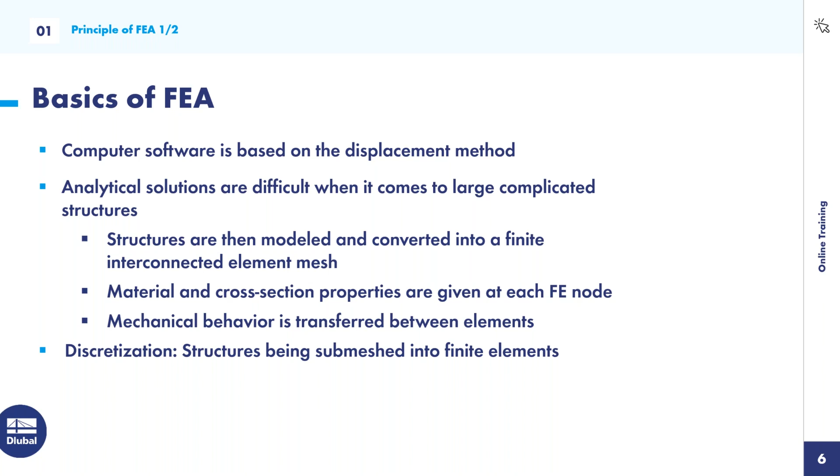The next thing to briefly get into is the FEA calculation workflow. I'm no expert on this; I just want to give you the overview and general knowledge of the workflow in step-by-step form. First, the program determines the local element stiffness properties. Second, the program changes stiffness properties at each node and converts them into the global coordinate system. Then the composition of the entire structure takes place.

Boundary conditions or supports are then defined, which can consist of sliding supports, rigid supports, and hinge supports, for example. Fifth, the displacement vectors are determined by solving the system of equations. And lastly, the support forces and internal forces can be determined, aka the results of the structure. With that general knowledge of the FEA workflow, we can dive into our next example, the continuous plate example.

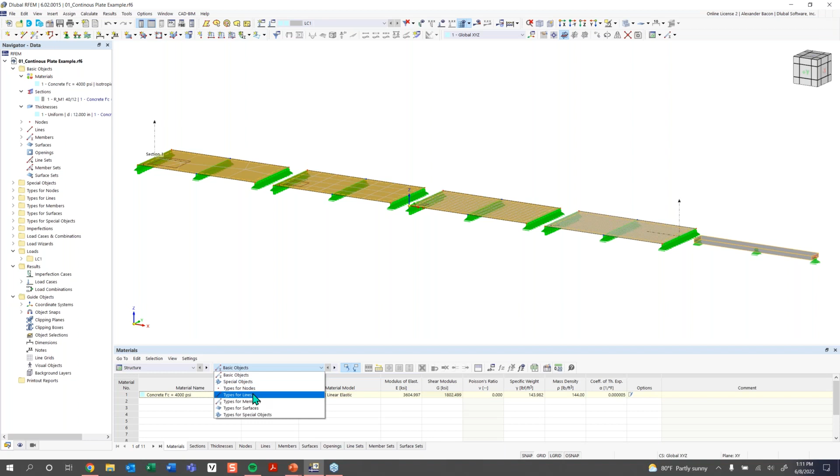And basically anything can be edited down to the coordinates of a node. So if I go to basic objects and node, you can see we have our coordinates for our nodes here, and these can all be adjusted. Also within the tables is where, if any design work is being done, all of the input data and results are going to be shown down here in the tables.

Next, you may notice that my background in my work window is white. Sometimes it can be black by default, if you've just recently downloaded RFEM. The color of the background can be changed to whatever you would like. So for example, if you go up here to options and you prefer a black background or a white background, that's under display properties here. And in the general category, we have background here. And then you can see you can change your background color to almost any color you'd like. So I'm going to keep mine as white, as I think for presenting it allows you guys to more easily see what I'm working with.

And that leads into the work window. So here's the work window. I can rotate my model, I can play around with it, I can manipulate it. So the work window is where almost all of your modeling will get done.

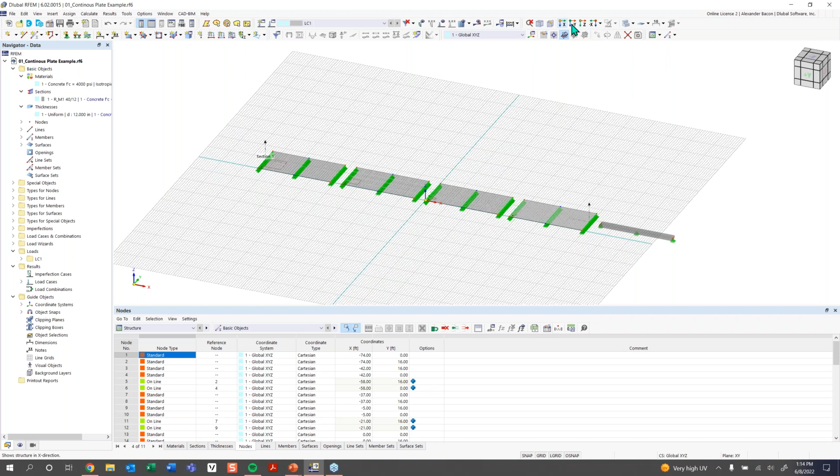Then next we have the views up here. So you can use these view buttons up here to change the view of your model, like so. And we also have a new addition, the cube up here, which also allows you to change your views as well. So this is one way to look and change the view of your structure. You can also hit this button and it will give you an isometric view as well.

Next, in the navigator here, right now, we're looking at the data panel. So there's multiple tabs down here in the navigator. So this first tab is called data. Second tab is called display. And within this display tab, I can collapse all of these subcategories here.

So we have subcategories such as model, results, and this display tab just allows you to turn graphically off and on anything that's shown in the window here. It doesn't deactivate or remove anything from your model structurally. It just deactivates the graphics.

So if I went under model here, and let's say I turned off surfaces, you can see the surfaces disappear. This doesn't actually remove the surfaces from the structural analysis portion. It just turns off the graphics. So basically, here is just where you can turn on and off things graphically. You can turn numbering on and off. So that's the display tab. It's kind of where you'll find all of that stuff.

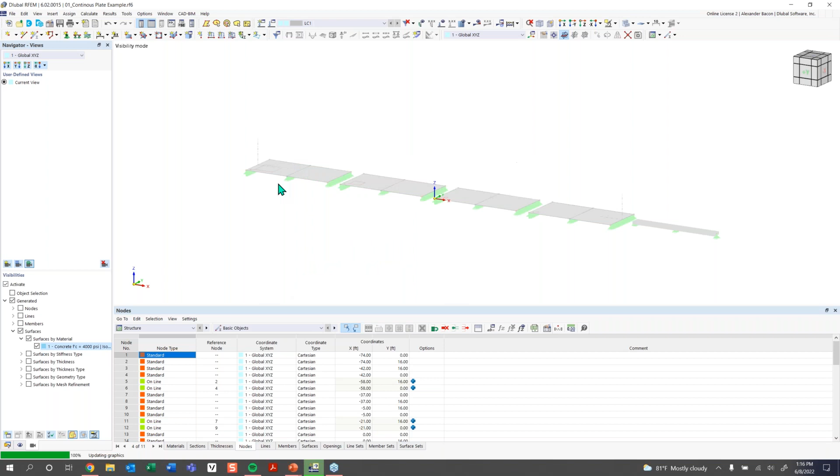Next, we have the views tab. This works a little bit similarly to the display tab, but with a function called visibilities, this can be activated. And now you'll see once I activate visibilities, I don't have anything visible to me in my model. That's deactivated. But let's say I only wanted to view surfaces that have a concrete material. You can see, once I activate the,

okay, so a little bit of crash there. Let's just reopen RFEM by closing out of that. And we can open RFEM back up. Sorry, everybody. One second.

And while that's opening up, should only take a couple seconds, we can give a poll. So the next poll I was going to give is this question. So throughout the training, I will be giving questions, and I would like to give this question. So that will launch now. If everyone could read it and answer it, then we can go over the results and correct answer afterwards. I'll give everyone a minute to do that, and we can continue after that.

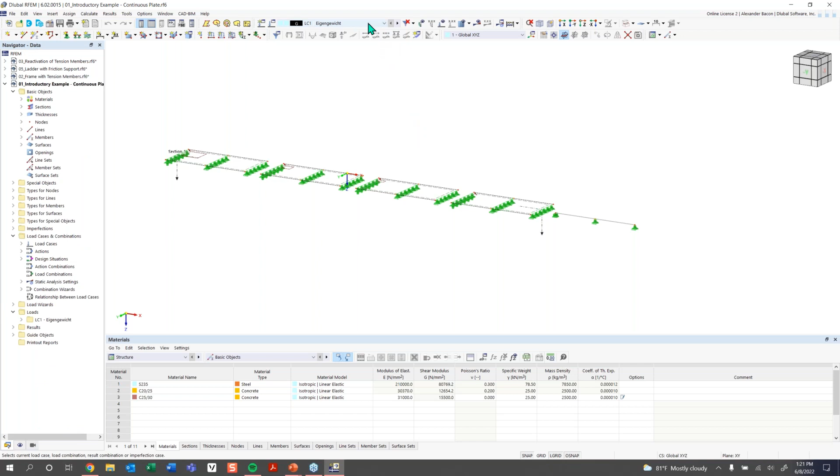And now jumping back into RFEM, the next thing I just want to do is just quickly run an analysis. So we're just going to run the results of this model real quick.

And then we're just going to quickly go over the results, nothing in detail. So just wanted to show you that once the results are run, this fourth tab here in the navigator panel is going to appear. As you may have seen before, we only had 3 tabs, but now the results have run, we have 4 tabs.

And then you're going to see these collapsible categories here. So we can either show our deformations, we can show member results, surface results. And this is how you manipulate and turn on and off the results you would like to see in the work window on the right-hand side here. So things like member internal forces, such as normal axial forces, shear forces, moments, torsional moments, things like that you can view on your members. And same with surfaces, you have internal forces and stresses, etc.

And also, when you're manipulating your model within the window here, if you have a mouse with a scroll wheel, you can click down on that middle button to move your model in translation. You can hold Control and click the middle mouse button to rotate the model, and then you can use that scroll wheel to zoom in and out.

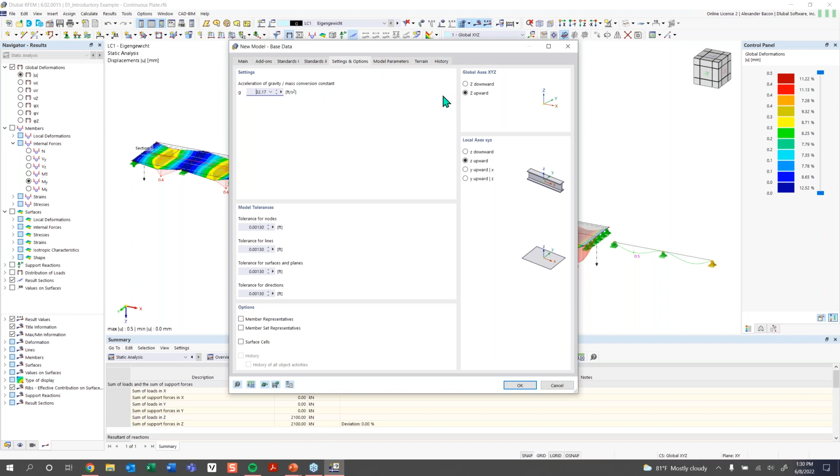Everything else we don't need to worry about. These other tabs we're going to skip for now. All we need to do now is click OK.

Once we click OK, a blank model will open up. Sometimes materials from other models can be carried over into this blank model, so I'm just going to delete those. Maybe some other sections can be carried over as well that are previously defined, so I'm going to delete those along with some thicknesses that were defined too. Now you can see in my work window I just have a blank grid here.

Now this grid can be customized. Let's go into the settings for the grid plane here. You can see we have grid points here. If we go up to this button, settings of work plane, grid/snap, etc., and click on this, we can take a look at our settings for our grid.

Right now the basic information is that we have a 50 by 50 grid points here. Right now my units are in meters, as you can see, so those points are spaced by meters.

I know this is an international training, so I want to show you that we can switch between imperial units and metric units. To do that, you can almost do that in any dialog box. You can see there's this button down here, units and decimal places. If we click on that, you can see under model that all of my units related to modeling are all in metric right now.

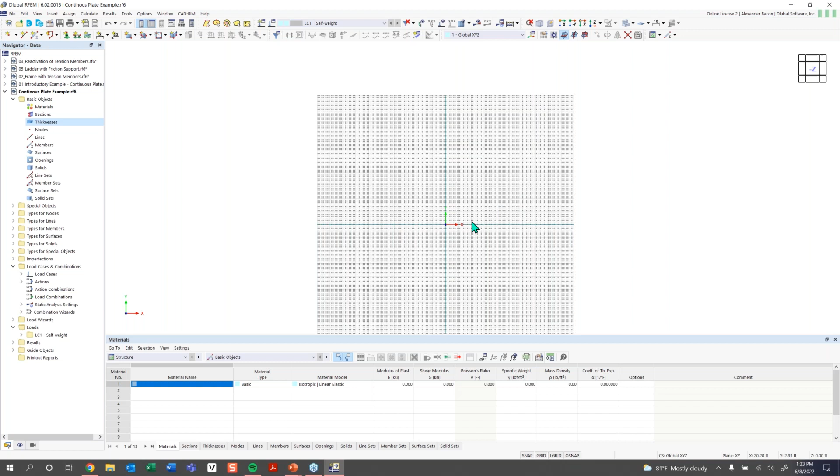You can see my grid here is 100 by 100 now. So now that we have the grid set up correctly, we can start to model our first continuous plate. I'm going to zoom in here.

I'm going to go up here to New Rectangular Surface, and this is the first tool that we want to use. I'm going to click on New Rectangular Surface to create this continuous plate, and now you can see this dialog box will pop up called New Rectangular Surface.

Then we just need to define a material for this surface and a thickness. First, we need to define a thickness, so I'm going to click on create a new thickness here, and the new thickness dialog box will pop up. Basically with the thickness, you can see what that is defining on the right hand side here. Normally you can think about this as with a beam member or column - that column requires a material and a cross section. As an analogy, you can think of the thickness as the cross section, and then we just need to give it a material. So every surface requires a thickness and material.

So we're going to make the thickness of this surface 12 inches. Then we're going to go here to material, and when choosing a material, you want to click on the button Import from Material Library.

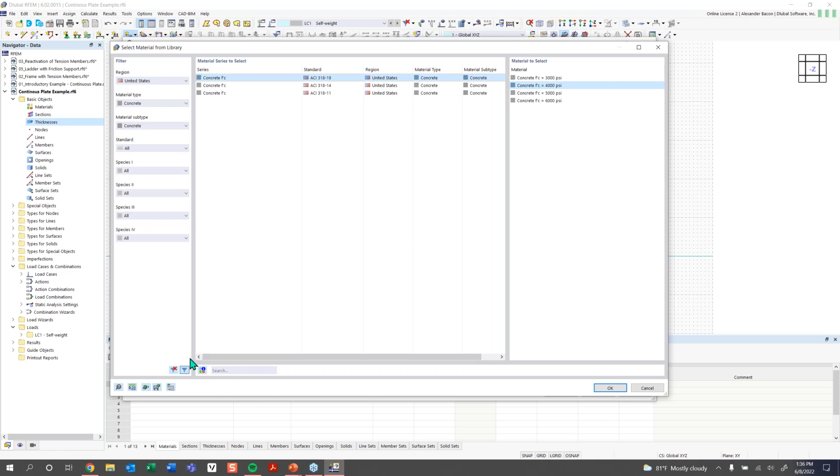On the right-hand side, we can choose the compressive strength of this concrete - we're going to choose 4,000 PSI. Now an easier way to do this is you can also just use the search function down here. Let's say I clear my filter here, I can simply type in concrete, and then I can find concrete here for the ACI and choose the compressive strength. So we'll stick with that - we chose concrete, 4,000 PSI.

The next thing I want to do, for example purposes, is edit this material by clicking on this edit button here. Once our edit material dialog box pops up, what I want to do is turn this material into a user-defined material, and I want to set my Poisson's ratio to 0, so this will give us equal distribution of our results across our surface, and then we can click OK.

This will help later on when evaluating our results. So now what we need to do is just click OK, click OK again, and once we click OK through all those boxes here, now you can see my cursor has changed to this reticle.

You can see that I am snapping to each one of these grid points here, so this will help me draw to the exact dimension to 1 foot the surface. You can also turn off the snap settings down here with this button, so you can turn those off and on. You can right click and see all of the different snap options - this is similar to AutoCAD in a sense.

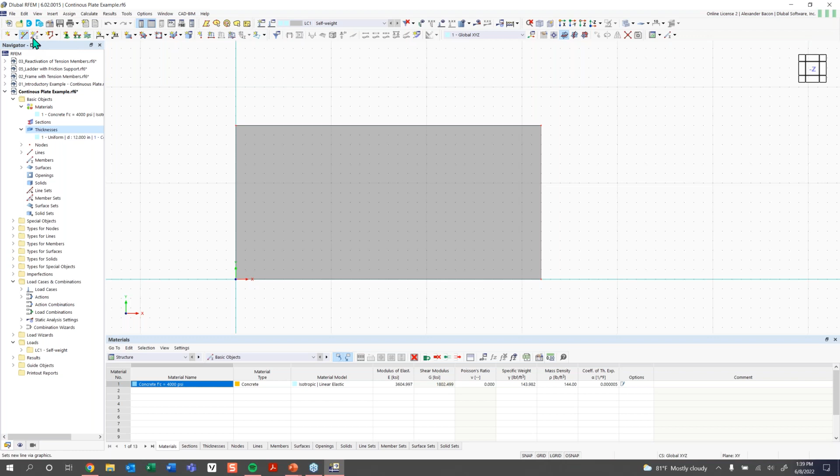Now all I need to do is either hit escape, or I can right click anywhere and simply exit out of that tool. Now the next thing we want to do is draw a line down the center, directly in the middle of this surface. To do that, we can go up here to the option New Line, and so you'll see the New Line tool will pop up, and now I can simply snap to the center of the top of this line here, left click, and just draw this line on top of this surface like so.

So that's how you can create a new line and draw a new line. We can right click out of that and right click again to exit fully out of that tool.

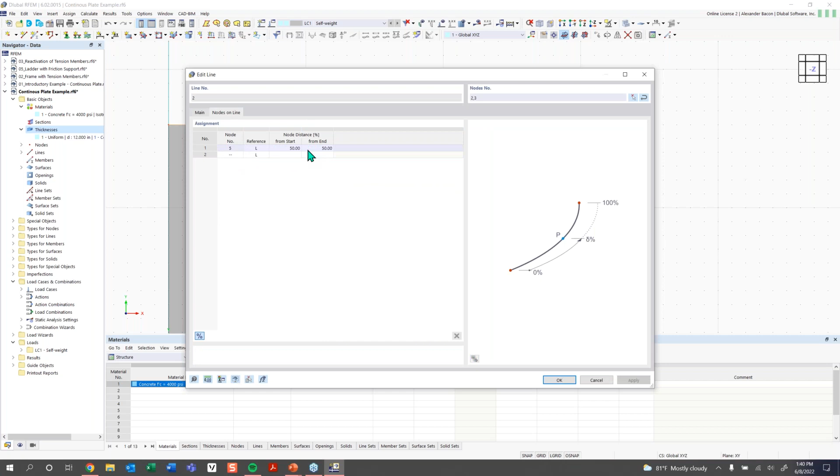Now you may notice that these nodes here are a different color compared to the corner nodes here. If we double click on one of these nodes to edit them, you'll see these nodes are set to the node type 'on line'. This means that if I click OK, these nodes are integrated into the line they're connecting to. So if I double click on this line and edit it, go to the Nodes on Line tab, you can see the node is being recognized and connected to the line I'm editing. If this node was set to the normal standard node type, it wouldn't be integrated into the line it's connecting to. This is done automatically, but it's good to know there are different node types.

Now that we have our concrete surface here, we want to support it. So to add in our supports, we want to continuously support the left-hand side of this plate, meaning we want to add a line support to this line on the left-hand side.

To do that, we can double click on it to edit it, and we have a list of options here. We want to add a support to the line, so this Support tab will pop up. Under line support, we hit this dropdown, and you can see we have a couple of preset definitions for what our line support should be.

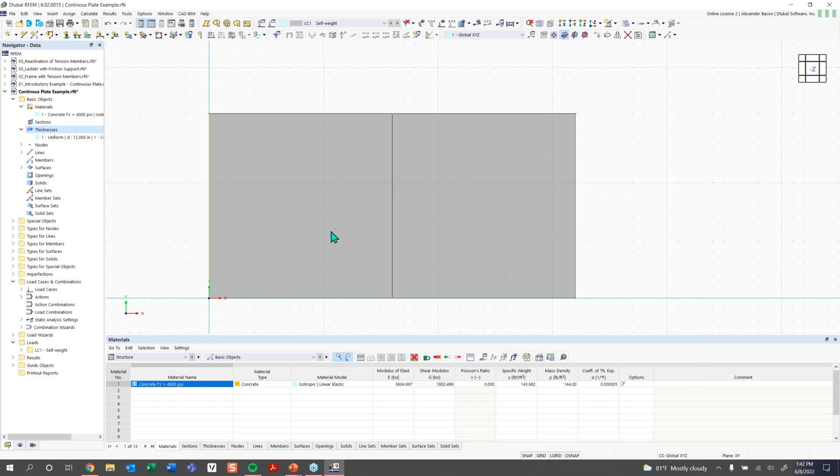I want this to be a hinged line support. A hinged line support means the first 3 translation degrees of freedom are fixed, so the support can't move in the X, Y, or Z directions, but rotation is fully released. This is what it's going to look like. We'll click OK, and click OK again, and now if I rotate the model, we have our side fully supported by those hinge supports.

Another thing to point out is if I double click on my line here in RFEM, you will always see the nodes making up your line. Also, if I edit this line support, you always see the assigned line that goes with it. So in RFEM, you're always going to know what objects are connected to each other via this upper right hand corner, and that helps you understand what's connected to what. So it's always clear there.

Now we can highlight our other 2 lines here, which we'd like to add supports to. If I hold Control and select these lines, there's also a button called Assign Line Support. I'll select that tool, and RFEM remembers my selection from before I clicked on it. You can see lines 3 and 5 are selected.

None of these presets are the definition of line support that I want, so I can create my own by clicking the new definition button. I want this support to be able to slide in the translational X direction, so I'm going to uncheck UX here, which fully releases the global X direction, but it's still supported in the Y and Z directions, and rotation is still fully released about the X, Y, and Z axes.

I'm going to click OK, click OK again, and now you can see those supports are added to my lines there.

Next thing we want to do is create a surface load, but before we can do that, it's very important to know that any loading you apply to your structure must have a load case assigned to it or associated with it.

So the next thing we want to do is create a new load case. You can see we already have our LC1 load case here, already created by default. The program will always create or have a load case that's already created. So what we can do is just click on the edit active load case here to look at that.

So this is where you can create load cases. You can have multiple load cases, and these will go into your combinations. We're not going to get into that this training. We're just going to focus on one single load case here. It has no action associated with it. We don't need to worry about that since we're not doing any design or anything like that, or load combinations.

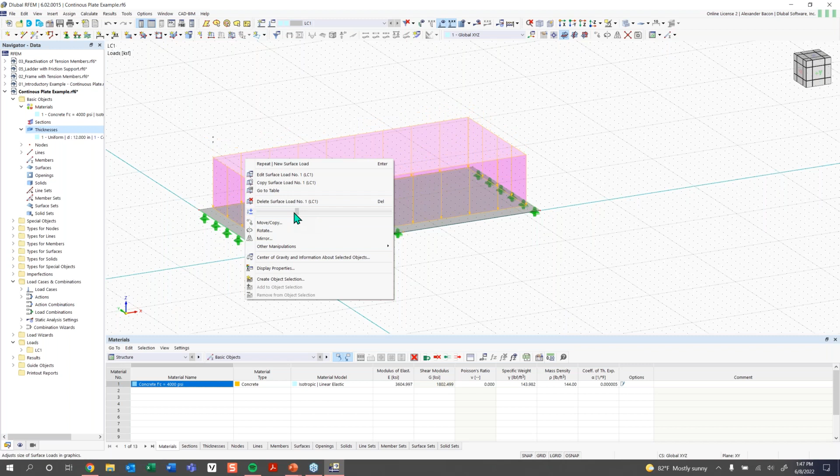Something else you can do is right click on this loading and you can adjust the size of it using this slider here if you would wish to do so. So now we have our plate here, it's supported, it's loaded. Next thing I want to go over is now the FE mesh settings, which are very important if you have a surface or any surfaces in your model. So to access the FE mesh settings, we can go up here to this button, hit this drop down, and we can access what's called the mesh settings here. And this is always important to look at before you run any results.

You can see these are the general settings, and right now under target length of finite elements, this is set to 1.64 feet, and this is going to be the global length that a finite element is set to throughout your entire model. So if this isn't changed, then this is going to be the length of your finite element. We're going to leave this as this length for now because we're going to add in what's called an FE mesh refinement. So with an FE mesh refinement, we can specifically tell the program for a specific surface what we want the FE mesh length to be.

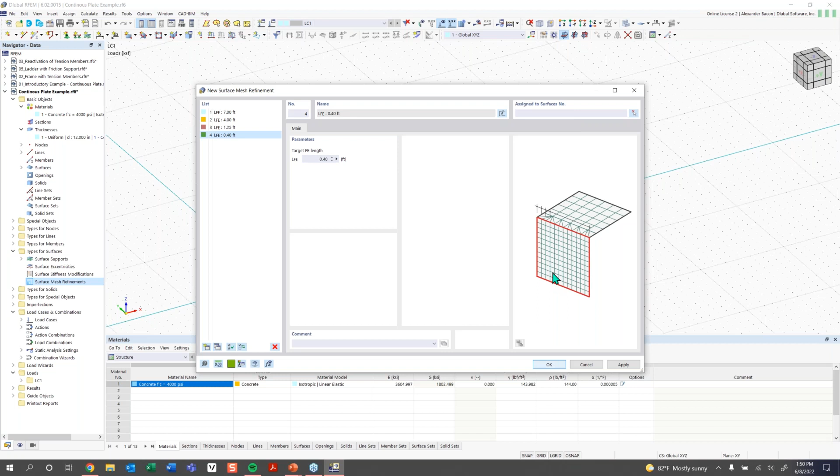And the next thing I want to do is make a copy of my surface here. So I'm going to highlight the whole thing here, and I'm going to use what's called our move/copy tool. With this tool, you can move something or make a copy of it, or do both at the same time, which is what we're going to do. We're going to create 3 copies of the surface. And we want to displace them 37 feet in the X direction. And what this allows for is a 5-foot spacing between each of these copies, since the surface is 32 feet long. And so now all we need to do is hit OK.

And now you can see I made 3 more copies of my surface here with all these supports and everything, and they're each 5 foot spaced apart. So now with our copies made, we want to create our single member, or our beam member, that we're going to use to compare results to.

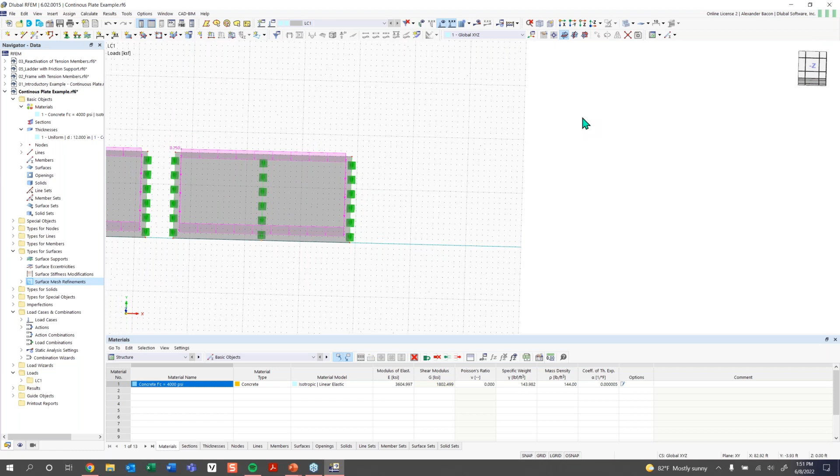Now to do that, you can see that we're going off my grid here a little bit, so I'm just going to highlight all of these plates and drag them to the left a little bit so we have some space here on the right hand side to model the member. So I'm going to hit reverse z-axis direction, and then I'm going to go up here to the button create new member.

Under new member, we're going to use the member type beam. This member type allows the member to take tension and compression forces and have fully fixed connections. What we want to do now is tell the program what cross-section this member is going to have and what material it's going to be made of.

So to define the cross-section, we can just go down here to section with material and click on this button, import from section library. Now here is the cross-section library that's in RFEM 6. You have different categories here. The category we're going to be focused on is the massive category, which is where we can choose our massive rectangle section.

And with this section, you can see we can define our material here. I already had a preset of our concrete 4000 PSI material, our isotropic linear elastic material here. And if this wasn't already defined, again, you can click on the material library, and this is the same material library that we've looked at from the surface.

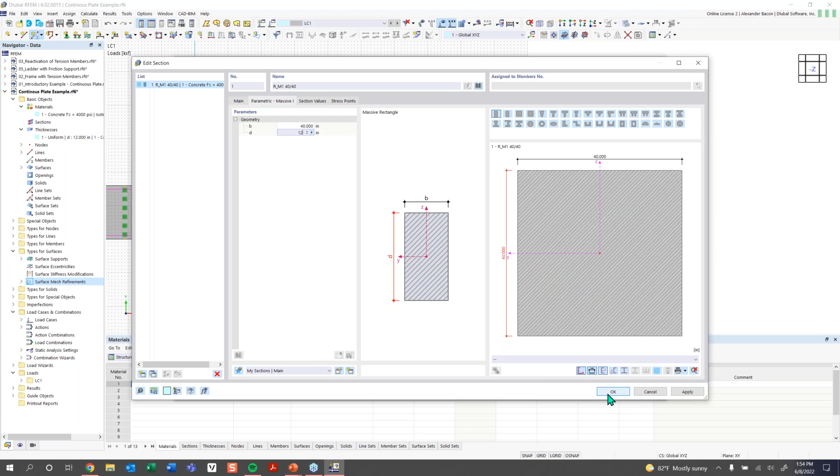Next thing we want to define is the parametric massive, or the dimensions. So we're going to go under the parametric massive tab here. I'm going to define the base, which is going to be 40 inches, and then the depth of the section is going to be 12 inches. So you can see how this is going to be similar in depth to our surface, which is what we're going to be comparing to. So with that defined, we can click OK and click OK again.

And now I can just draw my member, just like how I drew that line from before. I'm going to start drawing it 5 feet away from our plate here, right in the center. And I want this member to be the same length as the plate, which was 16 feet. So I can draw that 16 feet, or I can just type it on my keyboard without moving my mouse, 16 feet, and hit enter.

And I actually wanted to make that 32 feet. Sorry about that. So Control Z real quick. Let's see, draw that one more time. I actually wanted that to be 32 feet. There we go. Then I can right click, and now you can see we have our member here drawn the same length as our plates here.

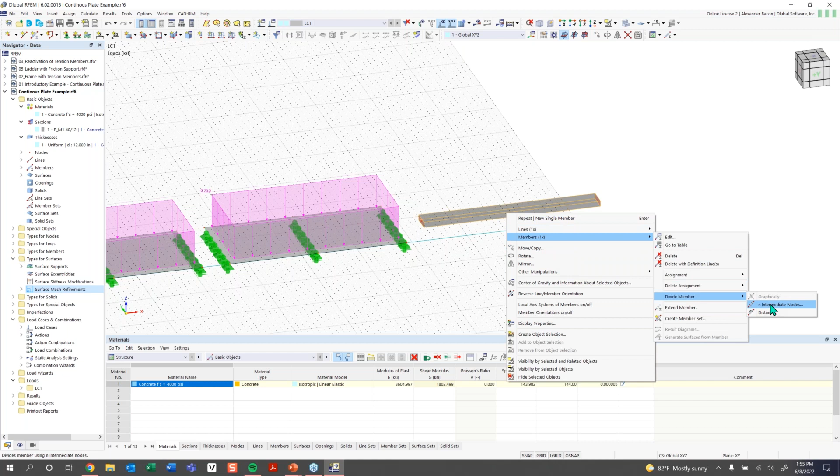Now this member is just floating in space right now, so we need to support it. I want to add a support directly in the middle of it. To do that, I need to add a node. So what I can do is divide this member by right-clicking on it, and you'll see my shortcuts menu will pop up. I want to go under member, divide member by a number of intermediate nodes. We really need to divide it by one node, so we're adding a node to the middle of the member.

But one critical option to turn on before doing this is create node on member, so that adds the node to the member without dividing it. We don't want to divide the member, we want to keep it as one single 32-foot long member, just with a node in the middle. So we'll turn that option on, divide it by one node, click OK. And now it's a little hard to see that node, but it's right there.

So now if I just highlight this first node here, we want to add our nodal supports. So I'm going to go up here to nodal support instead of line support, since this is for nodes. We'll click on nodal support. And we want this support to actually not just be a hinge support. You can see we have some presets here for nodal supports. We're going to want to create our own definition here, and I will explain why in just a little bit.

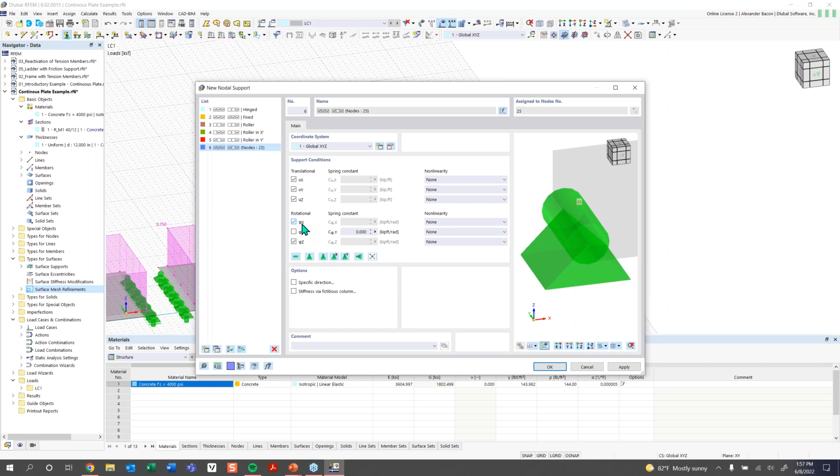But we want all of our translational degrees of freedom to be fully fixed, but we also want our rotation about the local x-axis of our member, or about the global x-axis of our member, to be fixed as well. So we're going to click OK. Click OK again, and so now you can see that support, the rotation about the x-axis is fixed there.

And now we're going to add in our other supports. So our other two supports for the middle and end of our member are going to be rolling supports that are allowed to roll or move along the global x-axis here. So we'll click OK. Oh, I just changed the support by accident. Let's just undo that. So again, we're going to choose rolling support. And with this, now we can just assign our support to our nodes here.

So the reason we needed to fix the rotation of the local x-axis for this one is if we didn't do that and all of these had the rotation fully released for all 3 degrees of freedom, this member would be allowed to spin about its own local x-axis indefinitely, causing an instability in the program. So always keep that in mind when you have a member that has torsion fully released on it, as that can cause an instability in the program.

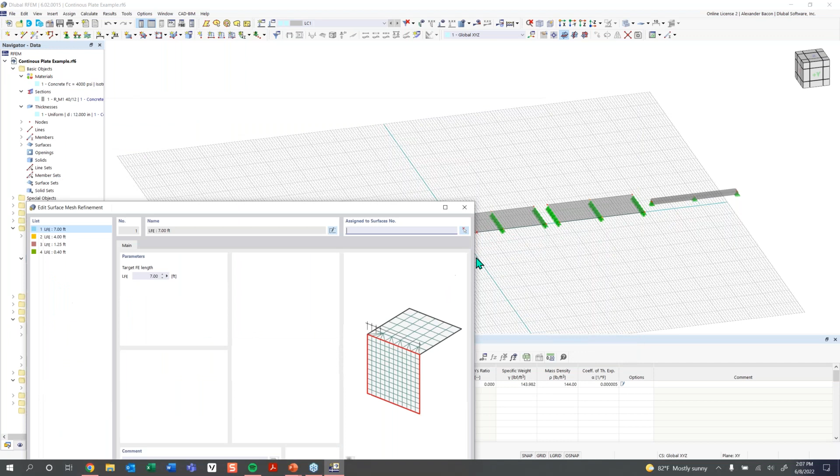So what we want to do is I'm just going to right-click on surface mesh refinements, hit edit, and go through here and assign them to our surfaces. So we're going to assign this first one to our first surface, and you can see we can do that graphically by hitting the button there and clicking on our first surface, clicking OK. We can do the same thing for our second refinement. Select surface here, select our second surface,

and then for our third one, again, we can do the same thing graphically, or if we know the number of our surface here, we can just type in 3, since this is surface 3 here, and then type in 4 for our last refinement, and hit OK. So now they change from blue to normal default color, and you can see we have these icons here now on top of our surfaces. And this is how you know that there's a surface mesh refinement on top of our surfaces here.

So now that we have those refinements, we can generate the FE mesh. And so to generate the FE mesh, you can do this manually. Normally this is just done once you run your results, but you can generate this mesh manually. So if we go up here to this drop down here and hit generate FE mesh, this will run the solver, and then our mesh will be displayed on our surfaces here.

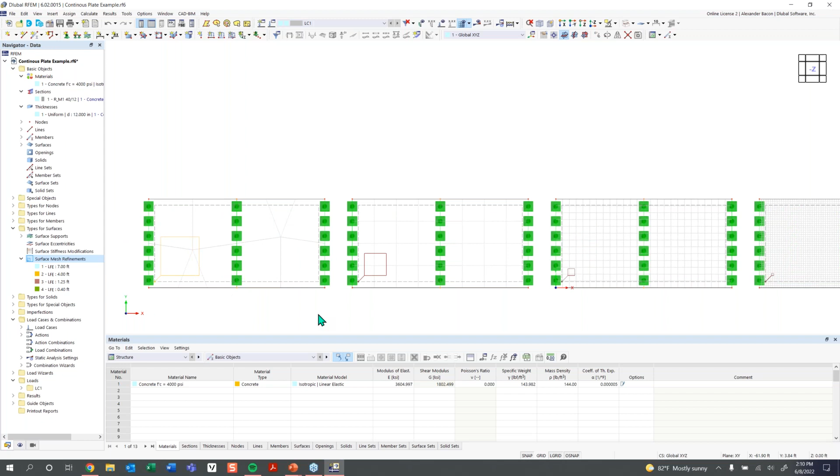So this first surface here, I would expect very inaccurate results from this surface. And as we move from left to right, the quality gets better. And I would expect very accurate results from surface 4 here on the right-hand side.

So the next thing we want to do now that we created our FE mesh is add in a results section that will cut through our surfaces here. So to do this, we can go up here to this button, set new results section. And to set a new results section, it just needs 2 points, point A and point B. We can click on this button up here, select 2 points graphically, and you can see I can snap to the center of my first surface here.

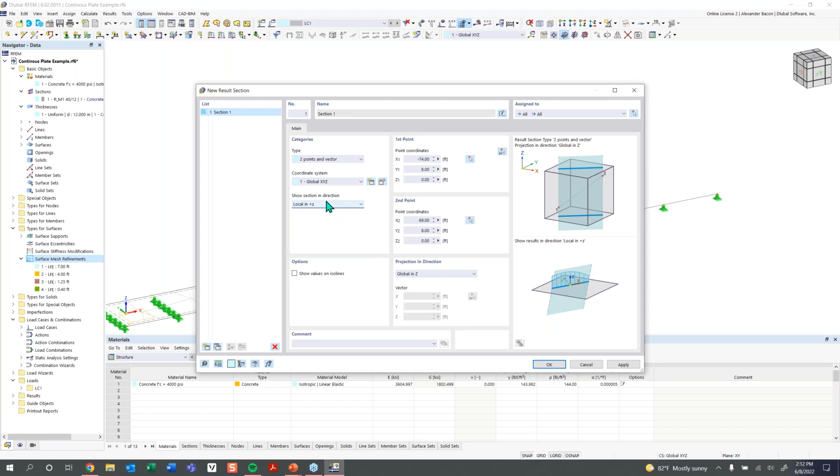And I'm going to draw this results section all the way through all of these surfaces here. So now we'll have a result plane section cut through all of our surfaces. And this is based on the global coordinate system, and it's going to be set in our local z-axes. So that's where the plane will be located, projection direction, and we can click OK. And now you can see we have these arrows here for our section cut. So it is in the global z-axis plane, and that's how our results will be shown.

So now we can calculate our results. We can go up here to this button called Calculate All. I'm going to click that, and RFEM will run through the solver and go through that FEA workflow that we talked about earlier and give us our results. Right now it is showing us the deformations, and also you'll see the results tab will pop up here.

And whenever you run your results, I always recommend taking a look at the global deformations first. This is always just an easy first visual way to check that everything is defined correctly and everything looks as you would expect. So if I look in this side view here of our model, the deformations are looking good, and they're looking just as we would expect them to look.

Now, whether this is accurate or not is up for discussion, but the internal forces are also the next thing we can take a look at. So we can turn off global deformations up here and check on members here.

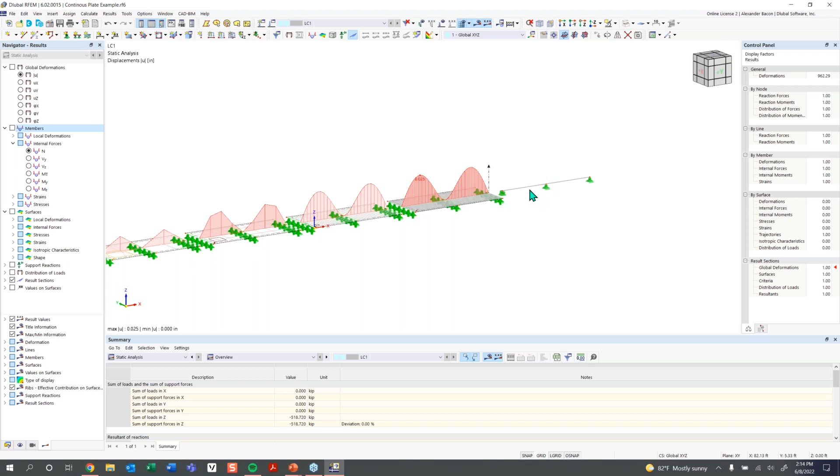And before we check on the results for the members, what we want to do is compare the results of our result section here with the results of our beam here. So what I'm going to do is select my surface here and select my beam. And what I can do is create a visibility by selected objects using this button.

And now you can see the other objects have been grayed out in the background, and now the only ones visible are the plate here and the beam. And what I'm about to show you is very important. So if we take a look at the results on the member, I'm going to check those on. You can see, one second, that my internal forces should be shown.

Oh, so what we need to do is check on moment. So we have checked on the results for members, and then under the internal forces here, we want to check on moments about the local y-axis. So that's what's being shown right here on our member, the moment about the local y-axis of our member.

So if you ever need to see how the local axis of the member is oriented, you can right click on any member and turn on the local axis system of the member. And so now you can see what that local axis system looks like right on the member, and you can see the moment distribution about the y-axis here.

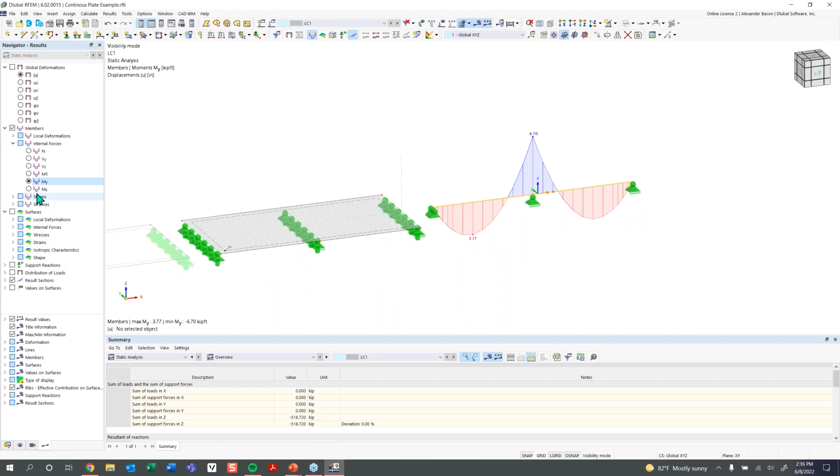Now we want to look at the moment distribution of our surface here. So I'm going to check on results for surface, and then go down here under the internal forces category, and I'm going to check on mx for basic internal forces. So mx here, again, lowercase x.

This means that for the surface, these are our bending moments in the direction of the local x-axis of the surface. So if I right-click on the surface, I can turn on the local axis system, and you can see the direction of that. And so we're showing the moments along that axis.

And so now I'm going to have to cancel out of this visibility. If I select these plates and members, there we go. So now you can see we can compare directly the moment distribution between our beam and our plate here. And these should be basically the same.

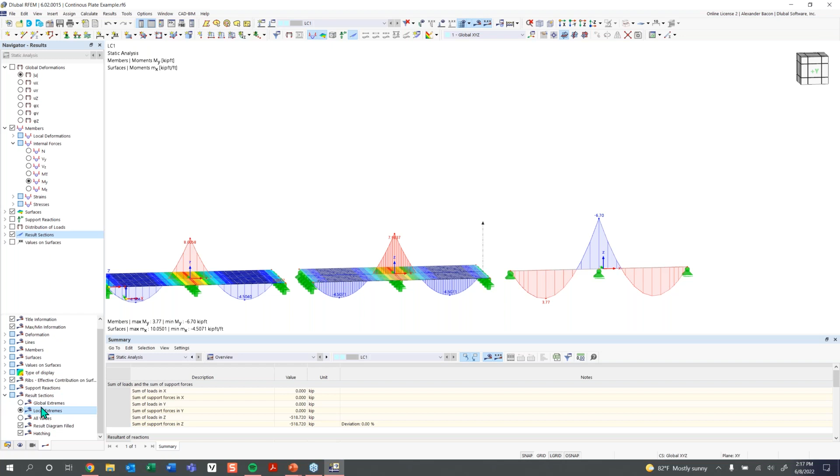So I'm going to also turn on results sections down here, turn on local extremes. So you can see that we have our results here, and they should be pretty close to the beam. And also we can show our shear force distribution as well. So I'm going to turn on the shear force in the Z direction, and then turn on the shear force for our surface in the X direction. And so we can compare those two.

So I was wondering why our results are a little off here. You can see I typed in the wrong magnitude here for either the surface or the plate. So I'm just going to change this to negative 0.25, and then rerun that calculation real quick. And we should see better comparison between those two elements.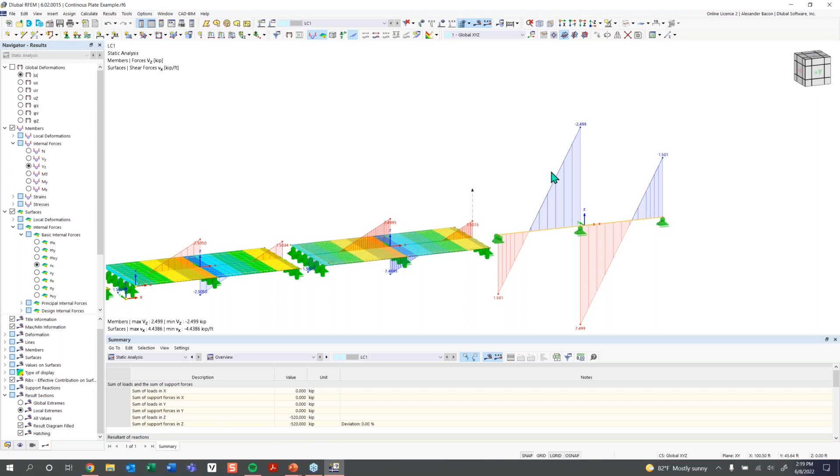Okay, so now you can see we have a max shear force here of 2.499 and a max shear force here of 2.499. So between our plate and our beam, we're getting very similar results. So this is how you can view the internal forces of a plate or beam.

And I just want you to keep in mind for these forces here what the lowercase axis symbol shows, and these all refer to the local axis system of what they're showing, so for surface and beam. So I'm going to clear those visibilities.

Also, there was a question about how to show the values on a surface, so I'm going to show that real quick. To show the values on a surface, we can simply go down here to values on surface and check that on.

And then you can see that the value is shown for each, if we go down here to result values... So we have values on surfaces turned on, and right here under values on surfaces, right now each value is set to a grid point. We can also change this to each FE mesh point, and you can also turn on symbols and numbering. So right now this is showing the shear in the X direction, so each of these is the shear that the surface is experiencing at that point. So it's always good to know how to view the values on a surface.

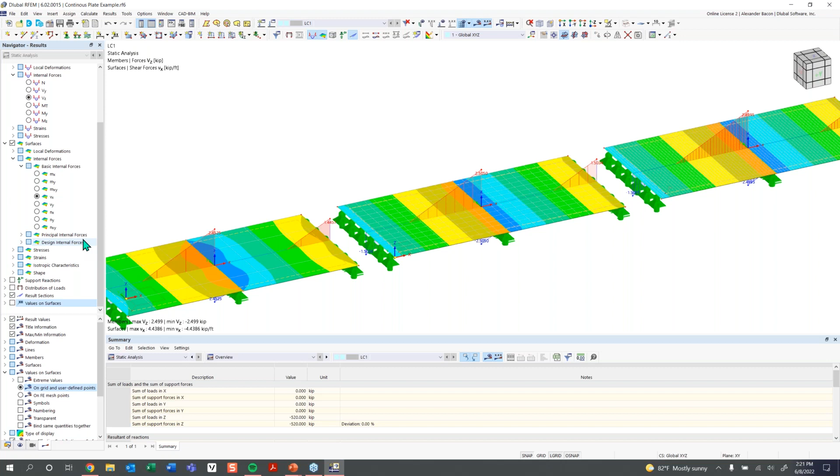And now we can move on to taking a closer look at our results sections for each of our plates here. So I'm going to go up here and turn on or look back at the bending moment for each of our plates here.

So if we take a look at each plate here, you can see that the bending moment is different for each one. Starting with this plate here, we have about 10 kip per foot, and you can see how that's decreasing, and each plate here with an increasing or decreasing mesh size is getting closer and closer to our control member here, which is what the result should be closer to. So you can see how inaccurate the results here of this plate with the larger, super coarse mesh size are. This shows the importance of making sure that your FE mesh is as fine as necessary but as coarse as possible, because if you don't check your FE mesh before running results, they can be inaccurate.

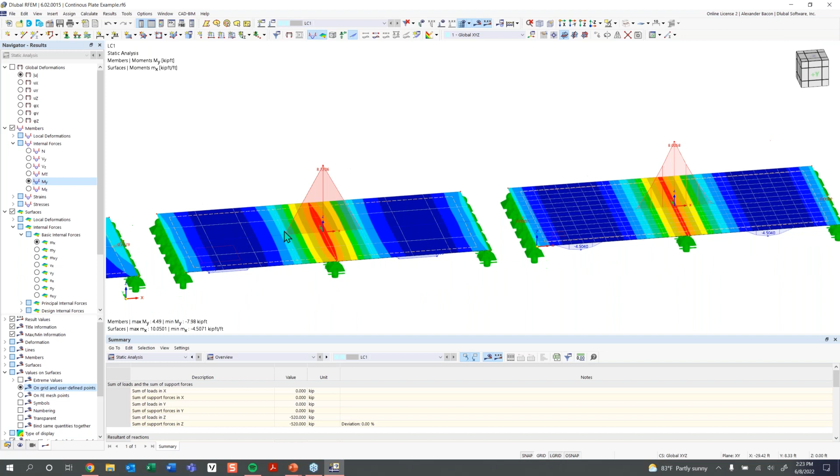Another good rule of thumb to keep in mind is to have at least 4 FE mesh blocks between any span or boundary of your surface. So 4 FE mesh blocks between any line here is usually probably the minimum you want your mesh to be at. So something like this would be too coarse, where we only have about 3 FE mesh blocks, or we have 4 - this would be about the minimum of how fine you would want your mesh to be. But as you can see, the finer the mesh, the more accurate the results.

Next thing to look at real quick is we can also take a look at the result diagram of our section here. So if we right click on our section, we can take a look at the result diagram. Right now we're looking at the internal forces Mx along our result section here. This is interesting because you can see what increasing or decreasing your mesh size does - having a finer mesh adds more data points along this line. You can see the more data points, the better looking our member or our moment diagram starts to look - it starts off very rough and then gets finer and finer.

So now I'd like to get into talking about shear stiffness. With shear stiffness, such as for this beam, if you wanted to compare hand calculations for this beam, you would have to take into account shear stiffness effects. Taking into account shear stiffness leads to things like increased deformation due to increased shear forces, and that in turn also leads to increased moments. This plays a major role with things like concrete, because the thicker something is, the more shear stiffness effects, or shear stiffness deformation effects, you will have.

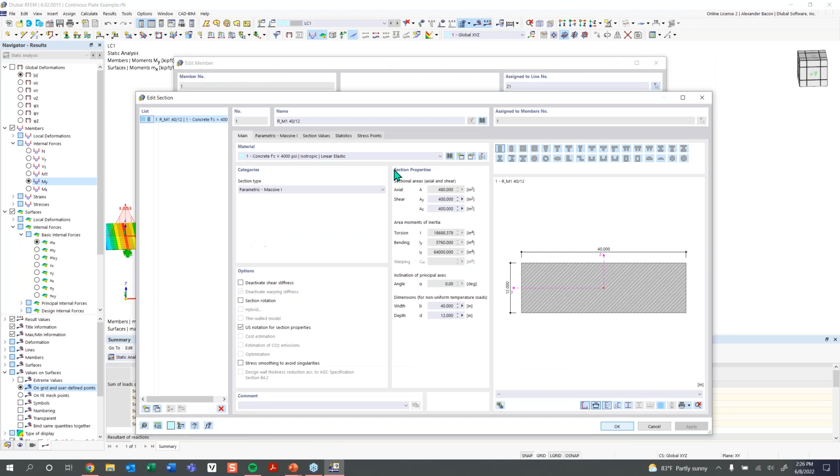There's an option called deactivate shear stiffness. If we deactivate shear stiffness and click OK, the program will tell us this requires deleting the results. We'll click yes, click OK again, and now we can run our results again, and we should see them change based on checking off this option.

Now you can see we have an increased moment here a little bit. Results haven't changed too much, but the moment has increased slightly, and this is because we deactivated the shear stiffness, or didn't take it into account with this beam.

Before we get into plate theory, I'd like to make an analogy between plate theory and two theories for beam elements. The first theory is Bernoulli's, and then the second theory is the Timoshenko theory, also called the deep beam theory.

With Bernoulli's theory we make some assumptions: first, that the cross section remains in plane and also perpendicular to the member axes. Second, that we do not consider any shear deformations, meaning the shear stiffness of the beam is completely rigid. These are the assumptions made with Bernoulli's theory, and this is probably what you're familiar with when doing hand calculations.

The assumptions we make with the Timoshenko theory are that the cross sections remain in plane, but don't remain perpendicular to the member axes. So shear deformations are taken into consideration here, and the shear stiffness is limited, not completely rigid. This is the more realistic approach, and we're taking into consideration not only deformations from bending, but also deformations from shear.

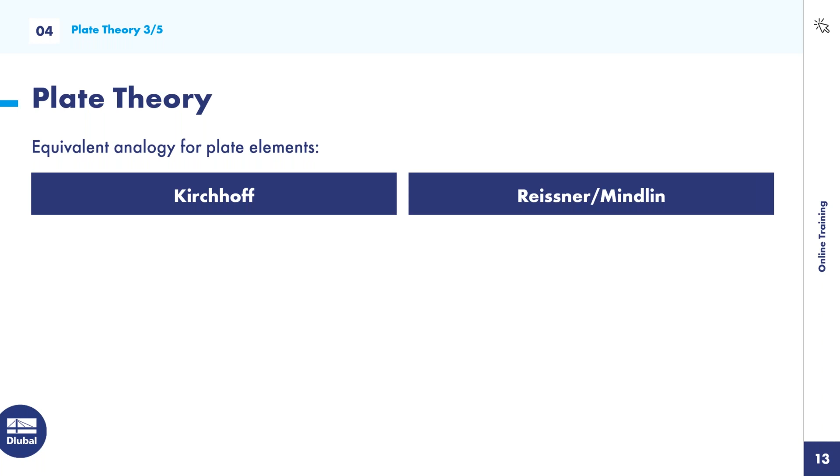So here are the assumptions for Kirchhoff's theory: we assume a geometrically linear or small deformation analysis, a linear elastic material based on Hooke's law, that the cross-section remains flat with no warping of the plate, and that the plate has a constant thickness.

And we're also assuming, which is the biggest assumption, that there's no consideration of shear deformations. And that's with Kirchhoff's theory.

Now, with the Reissner-Mindlin theory, we're assuming basically all of these same assumptions, but the major difference is that we are taking into consideration shear deformations, and including this, we are taking into consideration transverse and lateral strains.

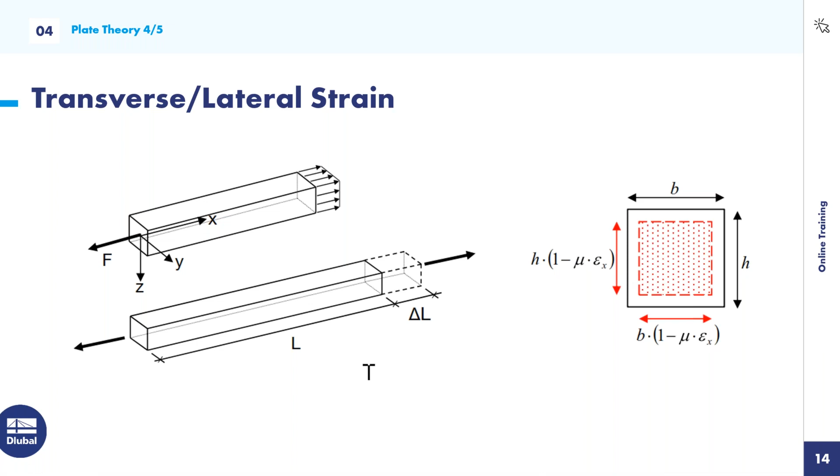So again, just to summarize, Kirchhoff's theory for plate theory yields pretty good results when using very thin plates, for example concrete slabs, like the ones we're using in our example. But keep in mind this only considers pure bending load bearing capacity, and it's just a simplified approach that works fairly well for thin plates. Again, no consideration of shear deformations with the Kirchhoff theory.

The Reissner-Mindlin theory, on the other hand, works great for thin plates and thick plates. The thicker the plate gets, the bigger the delta you'll see in the difference of results, and the more inaccurate Kirchhoff's theory becomes because of the shear deformations. The effect of shear deformations will greatly affect the thicker plates. So in my opinion, the Reissner-Mindlin theory should just be used by default, but it's good to know the difference between the two.

Now we can go back into RFEM and look at where these settings are located. If we go under the navigator here, under data, we can go under the load cases and combinations, then under the static analysis settings, and go under the geometrically linear settings to edit these. If we edit them, under basic settings, you can see the plate bending theory here, where you can change between Mindlin or the Kirchhoff theory. Like I said, Mindlin should just be used by default, but it's good for your knowledge to know we have the option between these two theories.

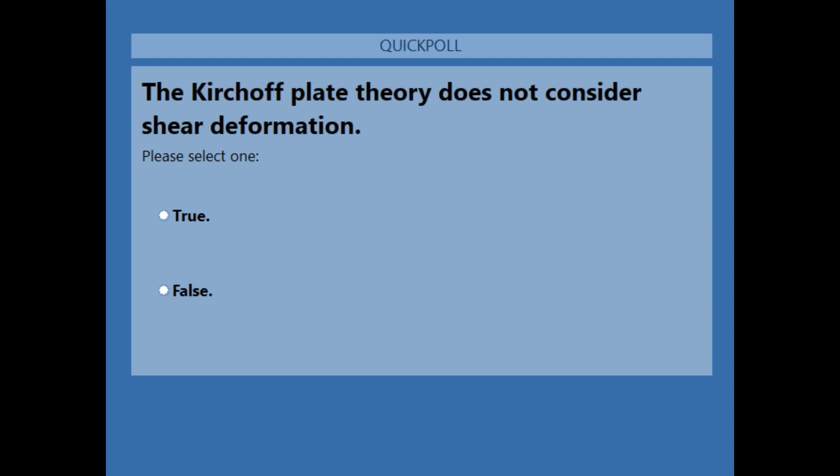All right, so I'm going to close that question and show the results. Awesome, everyone got this one correct. The Kirchhoff theory does not consider shear deformations - that is true. The Mindlin theory does consider shear deformation, so great job.

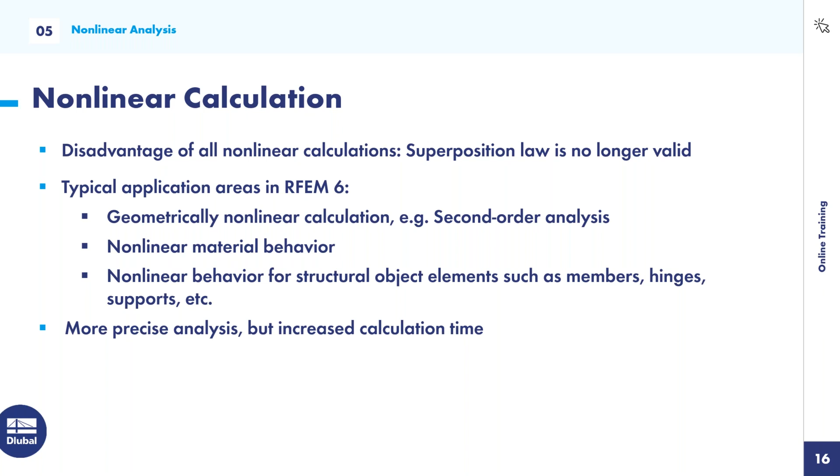Then we have nonlinear behaviors for structural objects or structural elements such as members, hinges, or supports, for example. We'll be getting into examples of these nonlinear behaviors in just a second. Keep in mind that these types of calculations can increase the accuracy of your model, but at a large scale can also increase the calculation efforts and time, similar to your FE mesh. So the more accurate you want your model to be, the more time is spent calculating. So we're going to go back to RFEM and look at some examples of these nonlinear calculations.

So I set up another model. I'm going to open that right now. And again, these models are going to be provided to you guys. You'll get them with the recording early next week or the beginning of next week, so I would expect these to show up on your end at that time.

For this model, I set up a frame, and this frame has some tension-only members in it. If I double click on one of these members here, on this cable element from this X bracing, you can see that the member type is set to tension. With this frame, we're going to imagine that the top of this frame is connected to another building. I'm going to turn off the grid so we can imagine that the top is connected and braced by another building. So we need to brace this wall in the global X direction, and this is the reason why we needed to add this X bracing in.

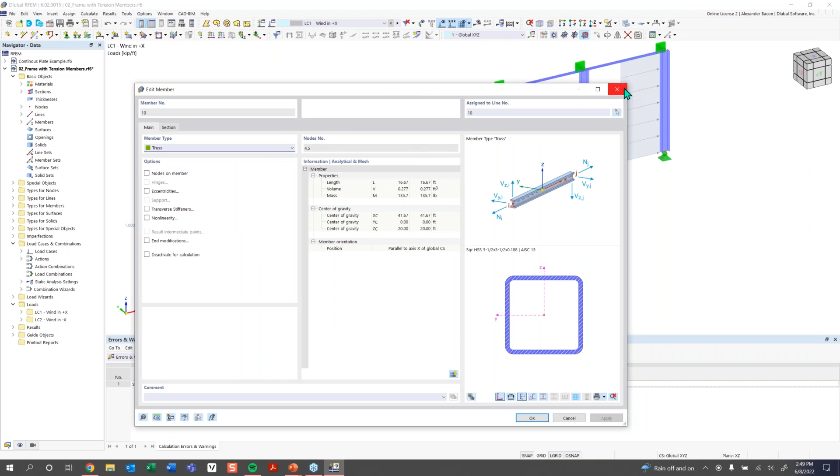The reason for this is because our structure is just not stable and needs support in the global X-axis. You can see that we have all hinge supports here. These supports up here are not providing any support in the X direction, all of our connections are hinged, and our members at the top are truss members, meaning that the moments at these connection points are fully released. So this whole model is just not supported in the global X direction. So we need to stabilize this model, and we can do that by adding in X bracing. So I can go up here to new single member.

And under new single member, you can see we have member types. So we have beam. Beam type is the type you are going to be most familiar with. This can take tension and compression and has fully fixed connection points, meaning moments and shear forces are transferred between connections.

We have a truss type here, which can only take axial forces like tension and compression, but the connection points are fully released, so no moments are transferred between connections. And then we have our tension members, which can only take tension and cannot take compression. So these are our nonlinear members here.

And what we want to do is go into our section here and change our cross section to a 1/4 of an inch round section here, which will act as our cable element. So we'll click OK. And now we can draw back in our X bracing here and do that like so.

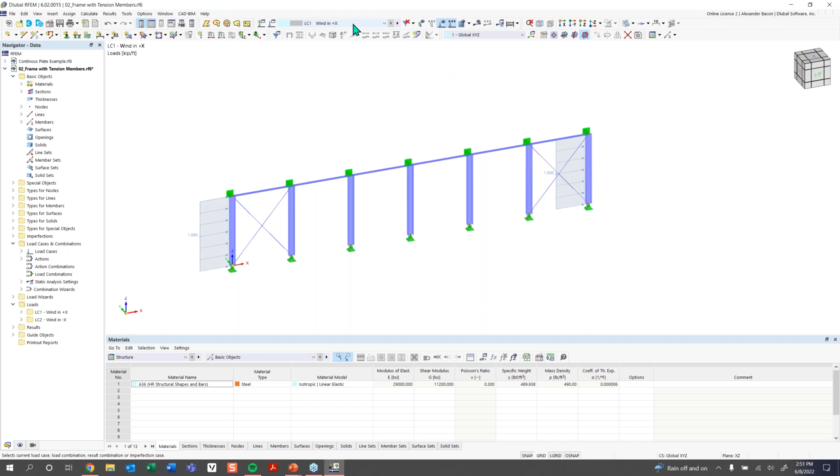And so now let's try running our results again. So now you can see that we have our results. And if we take a look at our deformations, we can turn off our loading. You can see that this member right here has extended since there's a wind load on this structure being forced into the X direction.

You can see that this cable element is still activated and taking on those tension forces. But this one here has been grayed out and has been disabled because it's taking compression and it cannot do that. And you can see the same thing for this tension element on the right-hand side.

We can also check on the results for our members and take a look at the normal forces or axial forces. And now we can see what the axial forces are on those two cable elements that are taking the tension. So red is positive for tension. You can see the blue here is negative for compression.

And then if we also take a look at our wind loads in the opposite direction, we should see the same thing. So we'll run that. And now you can see the same thing is happening if we take a look at our global deformations. The other member now is taking compression and disabling, and the opposite member is now taking the tension forces.

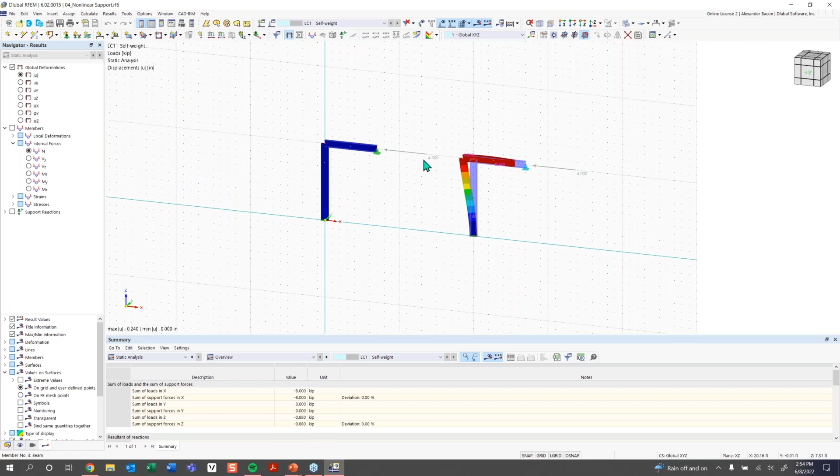And so with this model, you can see here, I just have two frames here supported at the top here. And you can see that I have on the right-hand side this nodal support here in blue. And the reason why this nodal support is in blue is because it's telling me that it's a nonlinear support.

So anytime you see a support that's blue and not green, that means it's a nonlinear support. Green means that it is a linear support. So let's double click on this support and see what's going on and edit it. And you can see under our definitions here, everything looks normal. All 3 degrees of translational freedom are fixed here. Our rotation about the global z-axis is fixed.

But for the x direction, we have a nonlinear set. So if I click on this drop down here under nonlinear, you can see I have checked on failure if negative px. And what this means is if this support experiences a negative support reaction, it will fail. So yeah, it'll fail, it'll disable, it won't add any support if a negative support reaction is activated.

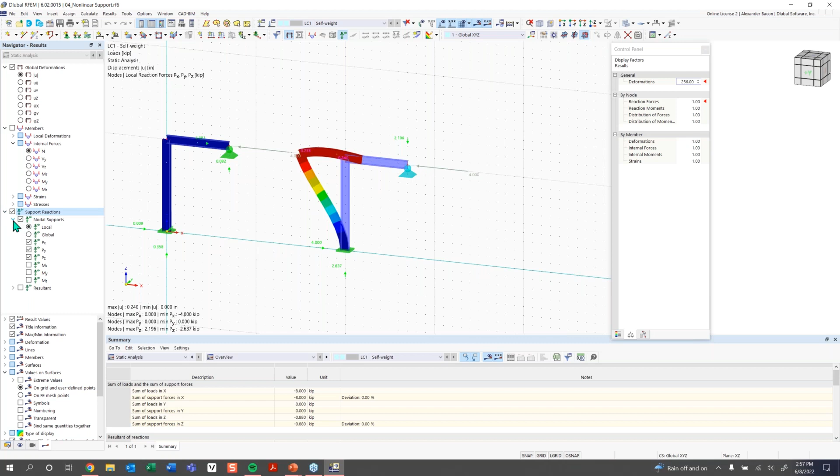And you can see here on the right-hand side that our nonlinear support with the same setup is failing because it's experiencing that negative support reaction. And so it's disabling, and you can see how that affects our frame here. And we can also take a look at our support reactions by turning on support reactions here, and we can see those support reactions from the forces there.

So before I get into the next example, it looks like we're approaching 3 o'clock, so I think we can take a break soon. So Siska, are there any questions from the chat? Yeah, we only have one question.

Someone asked if it's possible to assign hotkeys to a command. Okay, yeah. Yeah, that's possible in RFEM. You can assign hotkeys to a command, which is actually pretty helpful. To do that, let's say we wanted to change the command of the save function or something like that, you can go up here to the

customize menus and toolbars, and we can go under, let's say, tools, and let's say we wanted to add a keyboard shortcut to the measure function, for example. You can add a keyboard shortcut to any of these functions up here by just double clicking on them and then entering the shortcut on your keyboard, and you can set that. And so that's how you can assign hotkeys to any command within RFEM.

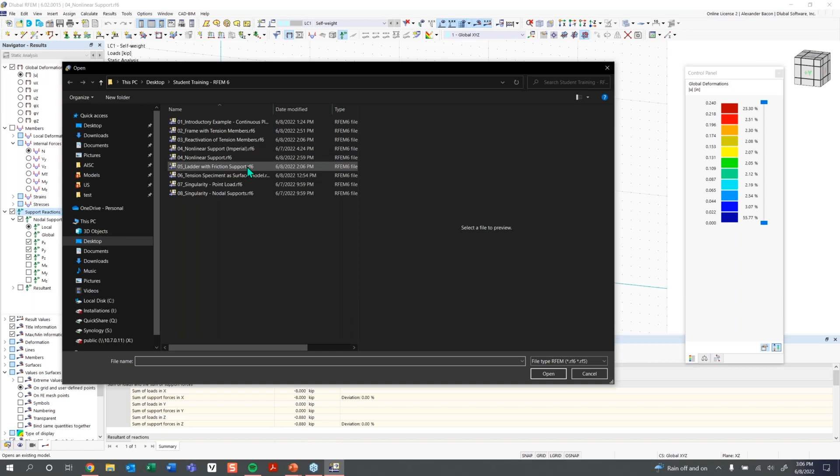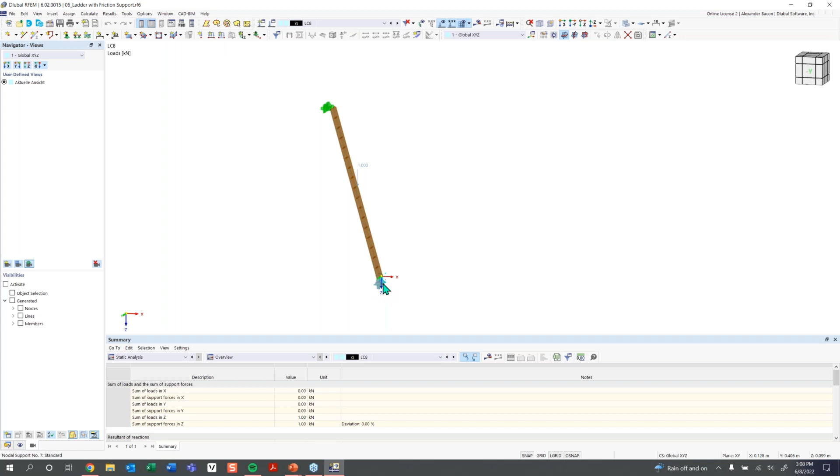And we're wondering, at what point will this ladder slip the higher and higher somebody climbs it? We want to make sure that the friction at the bottom is enough to keep this ladder from slipping out into the X direction the higher somebody climbs it. So what we did is we made these supports down here nonlinear supports. So if I edit these supports by double clicking on them and looking at the definitions of them,

you can see that there's no rotational support. They are fully fixed in the Z direction, so they're resting on a solid surface, but this ladder could slip out in the horizontal or lateral direction. So in the X direction and the Y direction, we have activated the nonlinearity friction PZ. And activating these, you can see that now we have some new tabs up here for UX friction PZ and UY friction PZ.

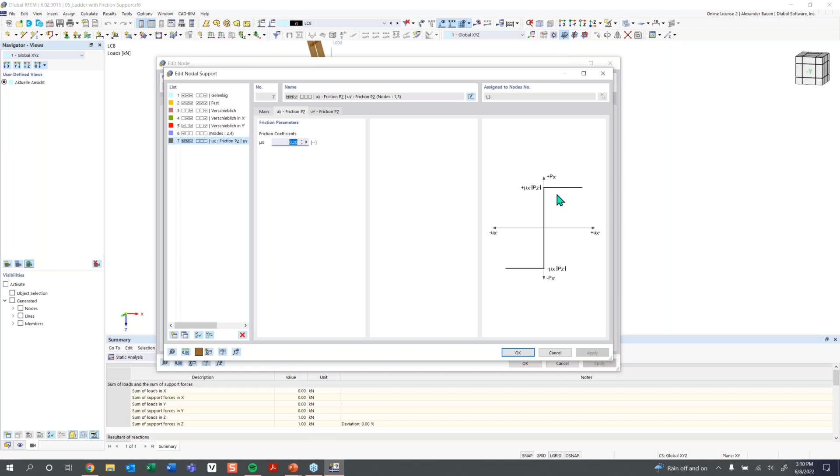Now if we look at UX friction PZ, you can see that we have entered a friction coefficient, μx, set to 0.2. And this basically sets a maximum bearing capacity for the support. If the reaction in the X direction exceeds the normal force, Pz, multiplied by this friction coefficient, then the support will fail. So basically the ladder will slip out either in the X direction or the Y direction. So again, this maximum bearing capacity relies on the normal force multiplied by the friction coefficient. If the reaction in the X direction exceeds that, then this support will fail and give out.

So let's see. If we click OK, let's click OK again, and let's run all of our results and see what happens when we run these results. So just looking at the deformations, we can see that for this first load case, where our loading is applied to the bottom rung here, we're fine; the ladder is staying in place.

But as we go to our next load case, as the force starts to go upwards, we can turn on our support reactions and see what our force is in the x direction. You can see we're at 0.03 here, and we're at 0.5 here for the normal force. As we increase our loading higher and higher, you can see that reaction in the x direction is increasing: 0.05, 0.06, 0.07, 0.08, 0.09, and boom, at load case 12

here, as we approach about 3 rungs down from the top of this ladder, you can see that our supports have given out, and the ladder is now slipping out because we have reached a reaction force in the x direction of 0.10 kilonewtons, and so this is exceeding our 0.2 multiplied by 0.5 here for our horizontal x direction. So these supports have released and given out, and now our ladder is slipping out.

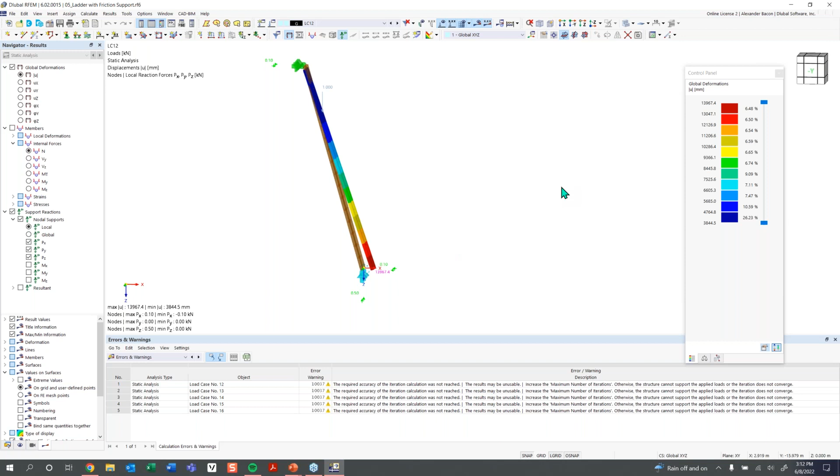So this is basically how you can use friction supports in RFEM and how useful these can be. And this is just one example of how friction supports can work and how they can slip. So moving on, our next example is going to be all about plastic analysis. So I'm going to open up the next model here.

So now with our next model here, this model is just a specimen of some sort, similar to something you would see in one of your material labs. So we can use this to go over the general concept of plastic analysis. The elastic deformation in a structural component is due to a load and is based on Hooke's law. Hooke's law is the linear stress and strain relationship which most material goes through if it is a linear elastic or isotropic elastic material.

So some examples you might want to take a look at are what happens after the elastic behavior of the material. Maybe you're curious about what happens after that material is no longer elastic and has entered the plastic region; you might want to see how it's yielded and what the behavior of that component is going to be after it has yielded, and that's basically what plastic analysis is.

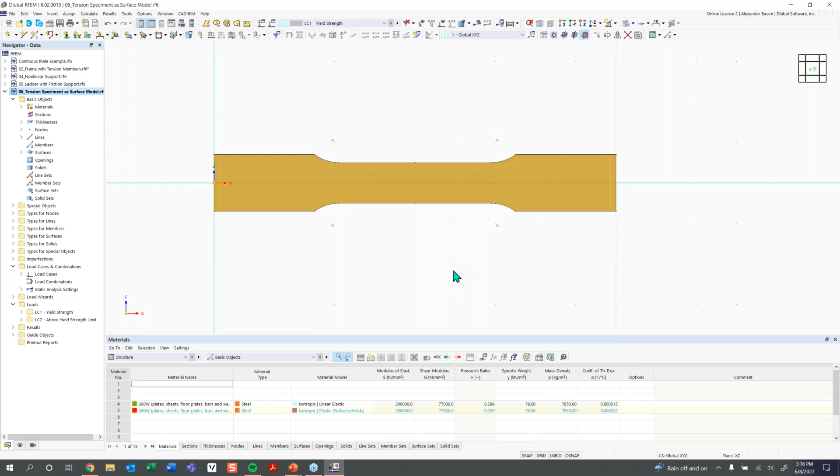And you can see the material right now that we're going to be using is an isotropic linear elastic material. I have another material defined here, and this one is an isotropic plastic material. So first we'll choose the isotropic linear elastic material and click OK. And so now our material is set to that isotropic linear elastic material. It is just steel 260W.

And so now with our load case here, we can just run the calculation. You can see I have a line load applied to the end of it, and we have some supports on the left-hand side here. So this line load is going to pull this specimen in tension, and we can run the results and see what that looks like.

So normally we would start off looking at the global deformations, but this isn't really the focus of this example. What we want to look at are the surface results, and more specifically, we want to filter down to the stresses on the surface. We want to filter to equivalent stresses, and then we want to take a look at our von Mises stresses. Von Mises stresses are a kind of stress theory that is commonly used for this kind of stress design for steel sections and surfaces.

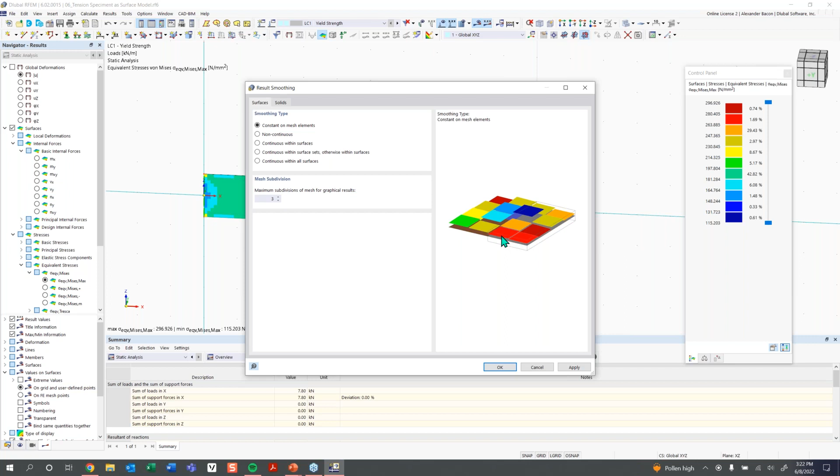Basically what constant on elements does is it shows the average value from the surrounding FE mesh points for that one single FE mesh element. This has no interruption from the surrounding elements, so that one single element is not taking into account any of the surrounding elements. And so this is what we want to set our FE mesh to. Normally, by default, this is set to continuous on surfaces, and you can see how each FE mesh element can take into consideration the results from surrounding elements, but we just want to see the average of each FE mesh point on one single finite element. So with that said, we can click OK.

And so now we can see the areas of the element that are higher than 260 newtons per square millimeter. With my control panel here, we can see the color coordination. I can zoom in a little bit more, and you can see we have that maximum loading applied, and you can see these red and darker red areas right here at the very top around these locations, in which this plate is experiencing higher stresses than 260 newtons per square millimeter.

And to even better visualize this, we can double click on the color panel here, and we can set a limit here to 260. And now you can get an even better visual of where those areas are that are being exceeded and where the material is exceeding that yield strength.

So you may be thinking this is steel and it's an isotropic material, and this can happen if it exceeds that yield strength. This limit can't be exceeded.

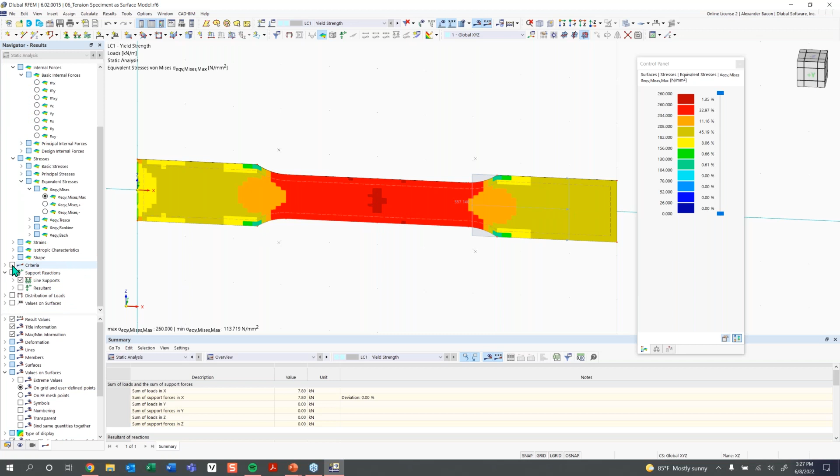And we can see where this plate is basically yielding, so it's hitting that max there. Then we can go over here on the left-hand side and check on criteria, and now you can see even better where this plate is yielding. Wherever 1.0 is, where this dark red is, that means these elements or these sections of this plate have fully yielded.

So now let's test what happens when we set a load here that is higher than the maximum, which I have done already. So if we go to LC2, you can see I have just increased this load a little higher than what the maximum should be, so we can see what happens when we run these results.

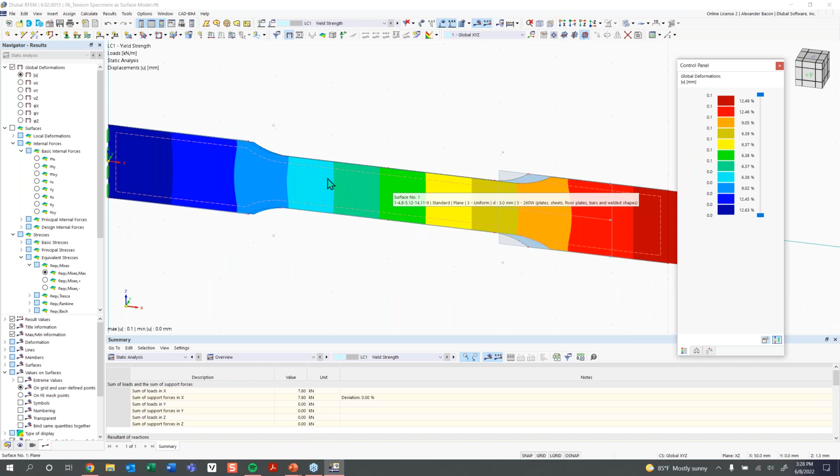So now let's take a look at the deformations of the exact limit of what this plate can handle. You can see we have our deformations here, and nothing's really deformed too much, it's just experiencing strain here in the X direction. But if we look at what happens when the limit is exceeded, you can see here that where the material has fully yielded, the lateral strain is causing the section to shrink, and we're getting even higher deformations of 4.4 millimeters since this section here has fully yielded.

And we can even play a little animation here, and you can see what the difference is between before it's yielded and what it looks like after it has yielded. This is something similar to what you might see in your labs when doing your material testing, and these are the kind of nonlinear effects that you can consider with an RFEM 6.

So now we can move on to our next subject and our last subject, which is singularities. So singularities, what are singularities? Where do they occur? Singularities are points of discontinuity in the calculation method or in the calculation model is what I mean. And this is an issue that doesn't only just occur with RFEM 6.

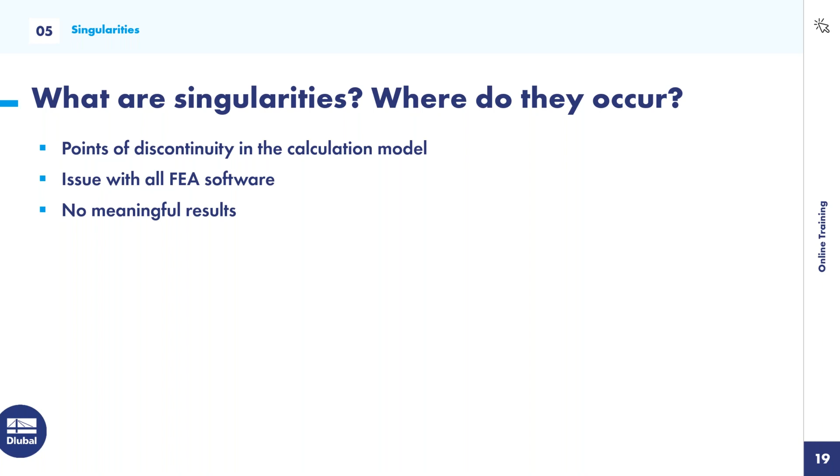This issue happens in all finite element analysis software. The result that comes out of a model with singularities, or at a singularity, these results are not meaningful or plausible and should not be taken into account. So what this means is that there is an issue with how RFEM solves the model.

There's no real physical issue with the structure. It's just how the software is solving the model. This causes infinite stresses and internal forces at a singularity, so you'll see very high stresses and very high internal forces at that location.

Mesh refinement, or increasing the mesh refinement, is not going to improve this result or help at all. It does give you, though, a better idea of the location of that singularity.

So types of singularity locations: point loads, line loads, and line supports can cause singularities. Openings, reentrant corners, or connecting corners can cause singularities. And stiffness changes due to a quick change in material or thickness can also cause singularities.

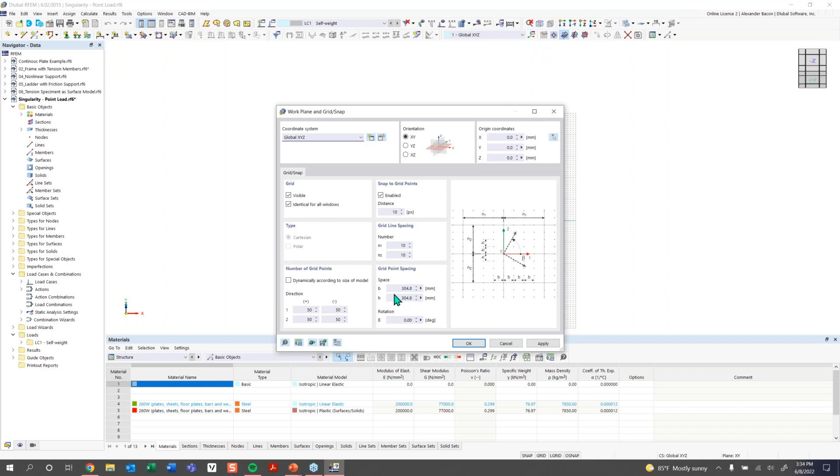Now you'll see our grid here, 50 by 50. Let's check our units - we will switch our units to imperial. Now we have our grid spacing in imperial, all of our units in imperial, and our grid spacing as 1 foot by 1 foot, 50 by 50. Now what we want to do is just create a concrete surface, kind of like what we did before.

I'm going to create a new thickness. You can see we have some materials and thickness carried over from previous examples. I'm going to click on new material - this opens up the material library. Now I'm just going to type in concrete, making this concrete 4,000 PSI, and click OK. We want the thickness of this to be arbitrarily 12 inches.

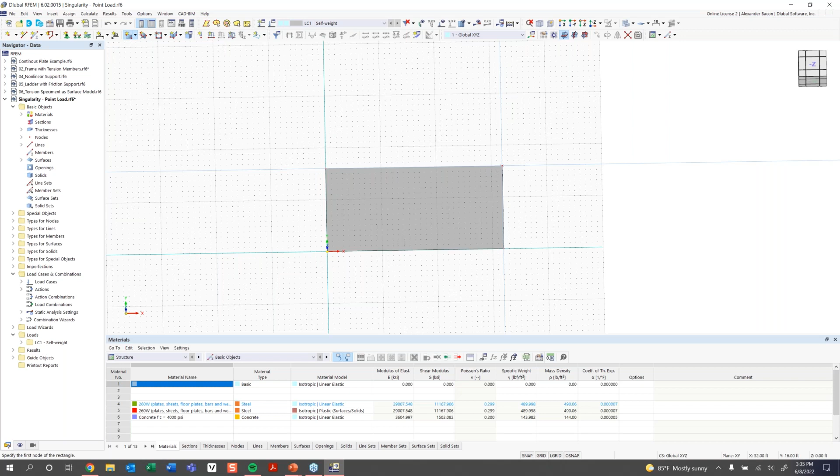Now we just need to draw out our surface here, similar to the plates we've drawn earlier. We're going to make it 32 by 16. Now we want to add a node directly in the middle here. The easiest way is we have a tool under new node called between two nodes - I click on that, click my two nodes here, and click apply. Now I have a node directly between those two nodes at the center.

What we want to do is add a point load to that. So now I'm adding a point load directly at the center of my concrete surface here. Set that point load to negative 10 kips in the global Z direction, and we can apply that right to the center there.

Then we can just add line supports - we just need to support this now. We're going to support the entire edge of this plate here. I can just highlight the whole thing, go to line support, choose the preset hinged, and now we can make 4 copies of this. We'll highlight it, right click, move/copy, create copy. We want 4 of these, so we'll make 3 additional copies, spaced out at 32 feet in the X direction.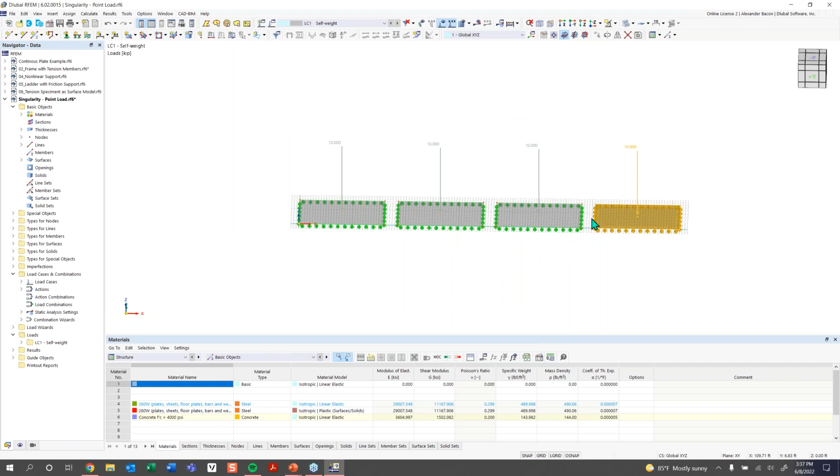If we didn't want to move our plates over, there's another option under grid settings to have the grid dynamically change according to the size of your model. So we could choose that - now you can see our grid here has dynamically rearranged itself to our model. We don't really need the grid anymore, so we can deactivate that. Now we can create some FE mesh refinements.

Another way to do that is we can go under structure here, basic objects. I just want to show you how to create these FE mesh refinements through the table, or how to use the table. So under structure, we can go under types for surfaces here, and then find the tab surface mesh refinements. And RFEM wants me to save - always good to save.

Never want to have something happen and you don't have your model saved. There's always backups created, but it's always good to save often.

Target FE length is going to be, for this first mesh refinement, 7. And then we're going to make 4, 1.25, and 0.4 feet. And now, since we know this is surface 1, I can turn on the numbering if I just want to see it displayed real quick.

Show numbering. So now we can see surface 1, 2, 3, and 4. So we want to assign the 7 feet to 1, 2, 3, and 4. So now our refinements were created here and we assign them to our surface.

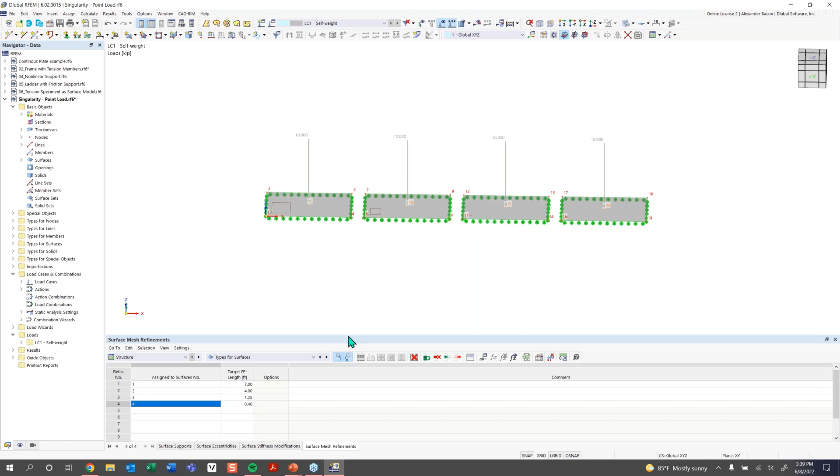And so now we just want to create a results section through our surfaces. So we're going to define that. Click OK. So you can see our LC1 here. We want to edit that to not take into consideration self-weight. So let's deactivate that. We'll just not have a name for it.

And now let's run our calculation, see what happens. So once our calculation runs, we'll get a better idea of what this all looks like. So first, before we look at anything, let's make sure results sections are activated, which they are. And then we want to go down here to our result views under results sections, and we want to activate local extremes.

So now we can see the extreme of each surface here. And our deformations look okay. They look good, nothing out of the ordinary here, so that's all right. Again, you can see our FE mesh there. Let's take a look at our bending moments on our surface here.

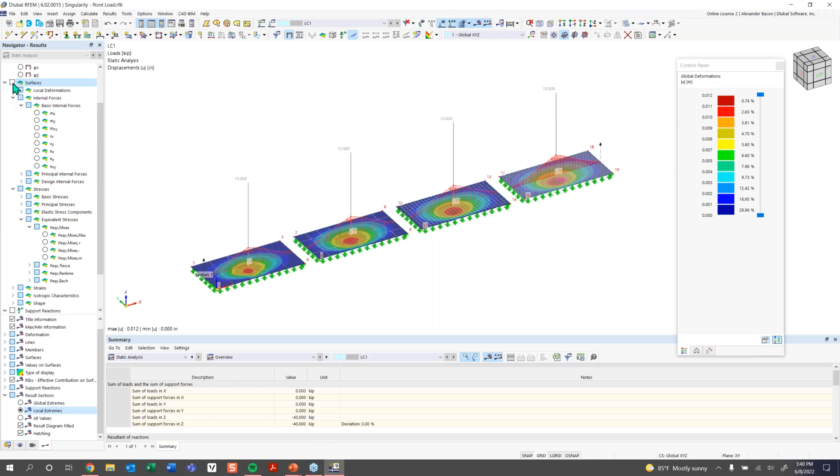So I'm going to activate surface results, moments along the local x-axis, and we can see our bending moments there. We have on the left-hand side here negative 2.9 kip feet, and we have a maximum over here of negative 5.59 kip feet.

So like we talked about earlier, we know that a finer FE mesh is better than a very coarse FE mesh like this left-hand side here. But which moment is the correct moment here? The answer is none of these. None of these moments are the correct moment. And that is because we are experiencing singularities here.

And so these results are not meaningful or useful. And we cannot use these results. And it really doesn't matter what size our FE mesh is here. None of these results are good. Even this one here, that's super fine. You would think I have a super fine FE mesh here. This result has to be accurate, but it's not.

It's just giving us a higher result, and it's allowing us to see more clearly where this singularity is happening. So what's the solution? The solution is to take this point load here that's feeding directly into one single FE mesh element and distribute this point load somehow.

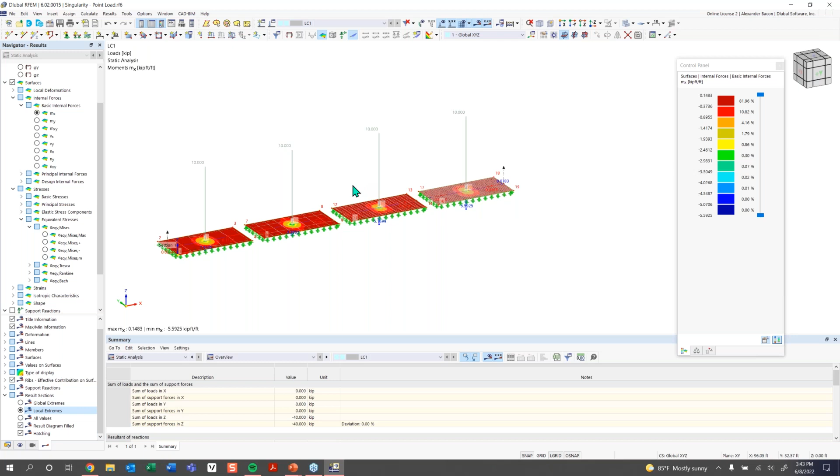And to distribute this point load, we can spread it out using a surface load. So we can take this load, this 10 kips, and we can pretend that this load is a column and the area of the column is 2 feet squared. So let's delete these point loads.

Yes, and we want to now apply some surface loads. So before we apply the surface load, maybe it's a good idea to show you what the rendered thickness of one of these surfaces looks like. So if I go down here into the display tab under model, I'm going to actually decrease the size. I cannot. So we're going to go under model here, rendering, model, solid model, surfaces,

and we want to choose filled thickness. And you can see that the thickness of these surfaces, the center line is located directly in the middle of the thickness, so you can see what the actual thickness of these looks like. And the reason it's good to know where the center line is located is because this is where the surface load is applied. And normally for concrete structures, the forces will propagate from the location of the load through the concrete at a 45-degree angle. So this is always just good to keep in mind that you need to take into account that the loading is going to be applied at the center of the thickness.

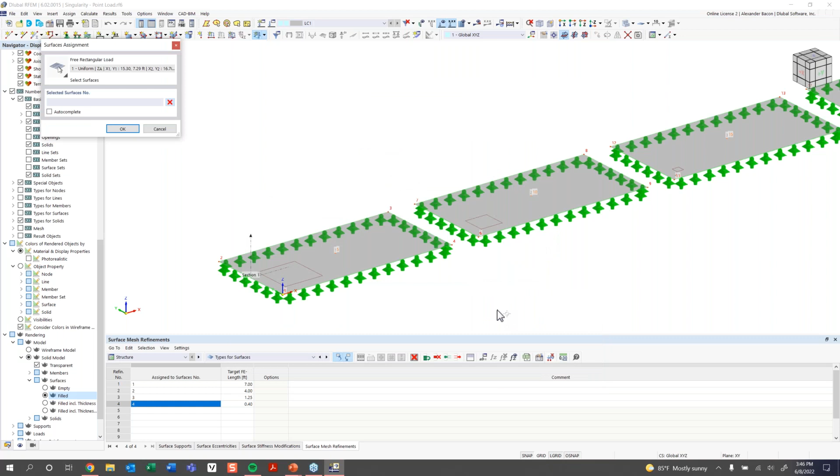And then we can just click on each one of these surfaces here, click OK. And now we have our free rectangular load here. I need to give it a negative sign to flip it, and we got to keep it at the center. It's fine. We'll click OK, flip it, and now we can just take our load here, hold Control, and just move and copy it to our other surfaces. So now we have our free rectangular load here applied to all our surfaces.

So we can hit calculate. And this calculation will run. And so now we can take a look at our moments here. We got to activate, take a look at our moments here. So now we're getting no singularities because at every surface here we have similar moments. So it's not as drastic as a change, but you can see between these last two surfaces, 1.9 and 2.6, definitely a lot better than before.

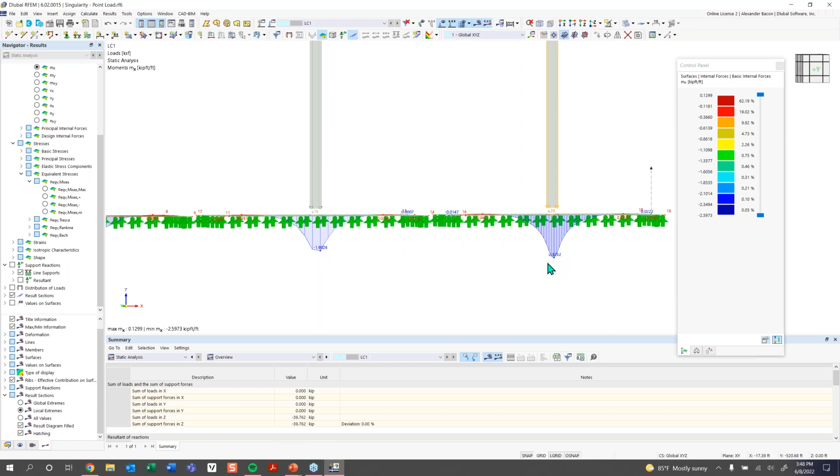And this is one of the ways you can combat point loads when they cause singularities. And again, you can see that our loading is not just feeding into one singular FE mesh point. It is being distributed across multiple FE mesh elements, which means we are avoiding a singularity issue. So it's always good to know multiple FE mesh nodes is better than just one.

Another way to combat singularities is if you have a results section, what you can do is go into the result diagram, and maybe you're analyzing your results in the result diagram. There's a tool in here which allows you to smooth over results or average them out over an area, which is called smooth ranges. And you can see smooth ranges are turned on right now, but what we can do is edit our smooth ranges, and we can choose a range. So we need to tell the program between what location and what location the smoothing needs to happen.

Usually this smoothing range is based on a connecting element or a connecting column. So the range would be the length of that column. So we're just assuming our column is 2 feet squared or 1 foot by 1 foot. And so let's say we would just want to apply that smooth range on the end here on our last plate, because this is probably our most accurate results. So we would have to start it at 111.295 feet and end it at 112.705 feet. And so then the length, as you can see, is 1.41. Click OK. And now you can see that our smooth range is applied.

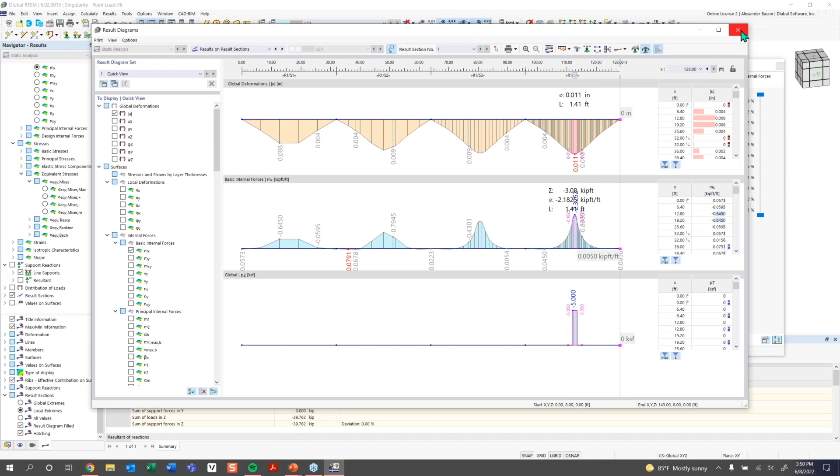We can also take this smooth range and we can move it throughout our result diagram here. So we can just keep that right there. This is usually just better for singularities, but as you can see the smoothed out results here, and that gives you a way to distribute the results within the result diagram. So I'm going to exit out of that.

And the next example, this is the last example I have. Normally I would model through it, but we're running low on time. So I'm just going to open an already saved model that I have here, and we can go over it.

So here, you can see this is similar to our last model, but with this model, we have, turn off the results here and shrink. Usually we would model through this, but we're running out of time. So I'm just going to go over this, but we have a plate here, and each of these plates has a surface load applied to it. And you can see we have a nodal support connected here. So we just have this nodal support and it's supported on this edge.

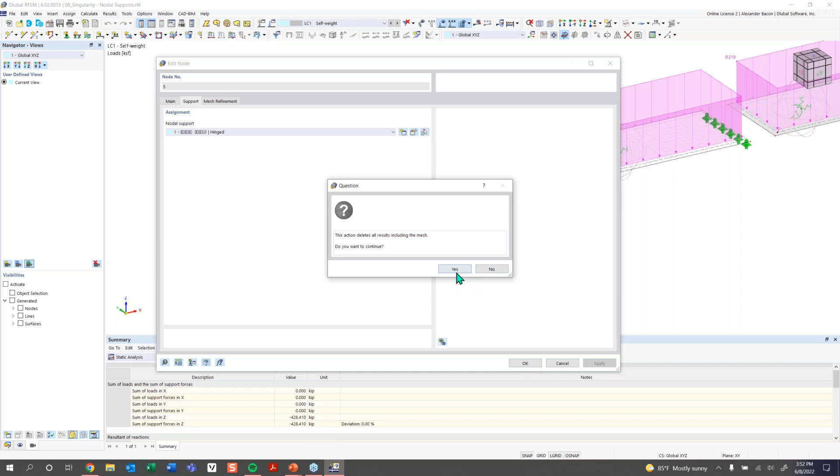And so what's happening is this nodal support, if I change it to a normal hinge support, all right, 1 second. Okay, we're just going to create a new nodal support here. We want it to just be a normal hinge support. There we go. And we'll change all of these to hinged. Okay, so if we run our results now, all we have is just this one nodal support holding up our plate here.

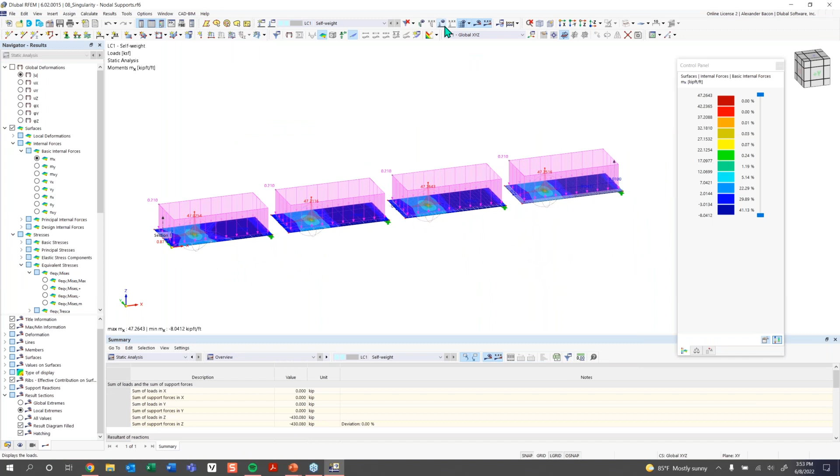And again, if I turn off the loading, you can see, well, we should be seeing a difference in results. I think I need to delete these. So once we run these results, we should see a singularity.

And one way to combat this is to change your supports from completely rigid to being semi-rigid and having less of a stiffness to them. Or you can also use the smooth ranges within the result diagram.

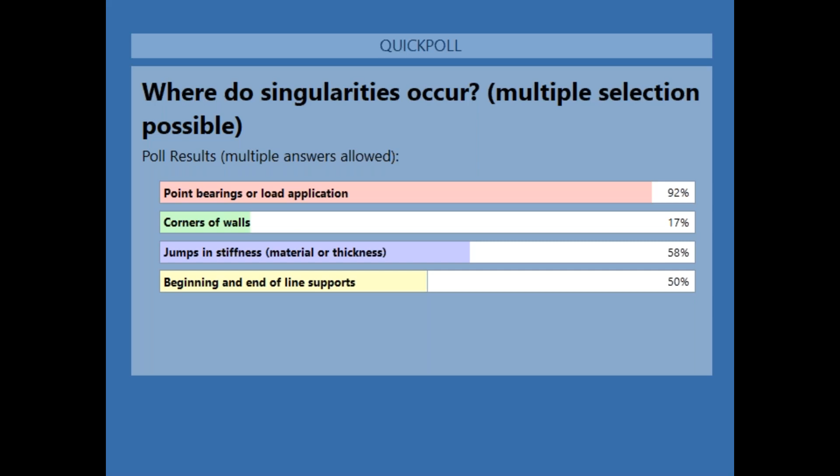Alex, can you show your RFEM? We're still seeing the poll. Oh yeah, thanks, Siska. I didn't see that. Yep, so sorry about that.